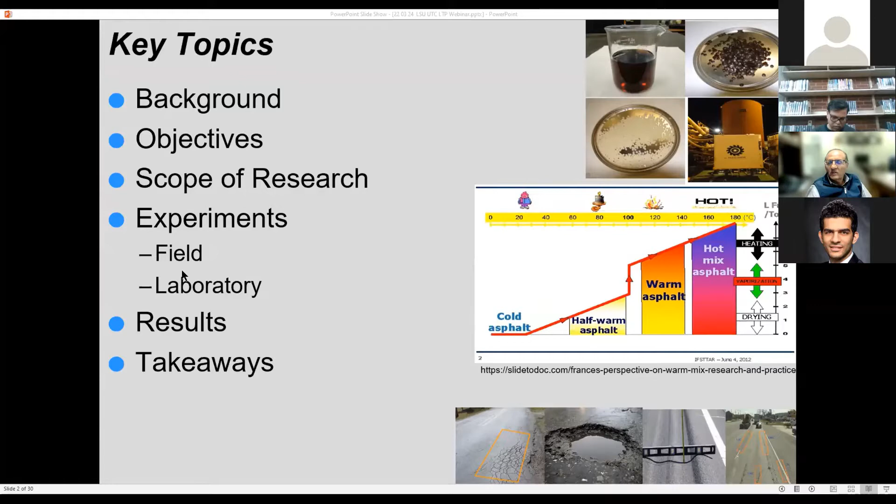Asphalt mixture has component materials typically that are asphalt binder and aggregates, and more often than not, additives are included in the mixture in order to improve performance and durability. Durability is a key topic, particularly at the national and federal level, specifically for those familiar with the Code of Federal Regulation, where it says that pavements shall be designed to accommodate current and predicted traffic needs in a safe, durable, and cost-effective manner.

So what are these things that can improve durability? First, let's know what is a durable pavement. It's one that typically would resist permanent deformation, fatigue cracking, low temperature cracking, moisture damage, raveling, durability, among other things. So these are some major distresses.

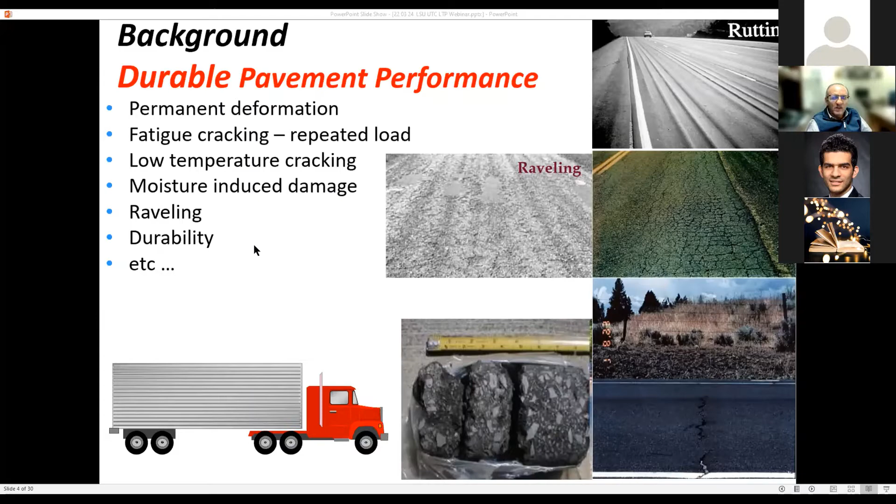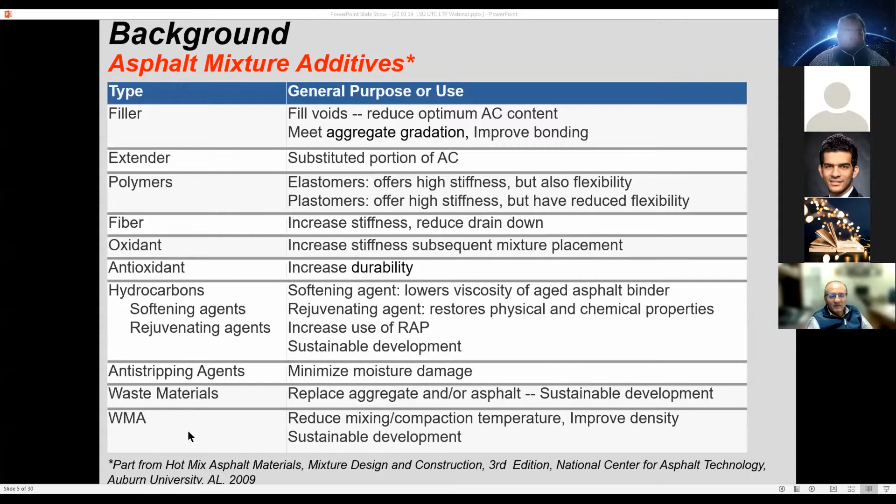The additives that are typically added into asphalt mixtures fall into a category, and these are the list of categories one can look at. They range from fillers, extenders, polymers, fibers, oxidants, antioxidants, hydrocarbons, anti-strip additives, waste material, and finally you see warm mix asphalt.

And this is our topic because it can improve durability. One of the characteristics these additives have is that they can reduce mixing and compaction temperature, which eventually leads to improved density. And further, it participates in the development of sustainable activities.

When one talks about sustainable technologies in flexible pavements, they can come in different types, falling into two categories. One can be sustainable by the type of material included in the asphalt mixtures, as listed here, or they can be sustainable by the way they're built, and there are many different ways.

This is what we're talking about today: the practice of construction where one can include additives. This particular additive is WMA, and it comes in different types. It could be chemical, organic, water-based, and also an equipment variation such as the Astec double barrel type of plant.

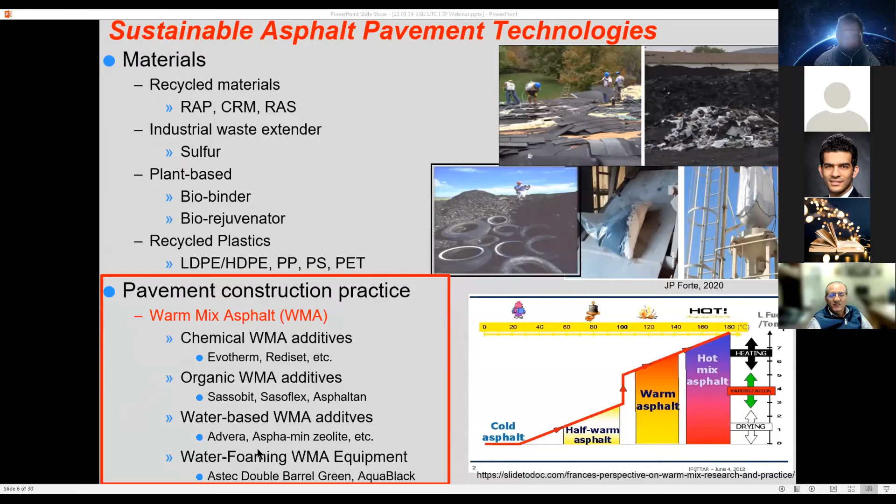This slide shows a recent survey done in 2019 by the National Asphalt Pavement Association, which cites about 157 million tons of asphalt mixtures produced in this country, and a significant amount of that, about 80 million tons, included WMA technology. So we are making headway into including those additives since it was introduced about 10 to 15 years ago. That study also showed that typically 10 degrees Fahrenheit is used to reduce temperature.

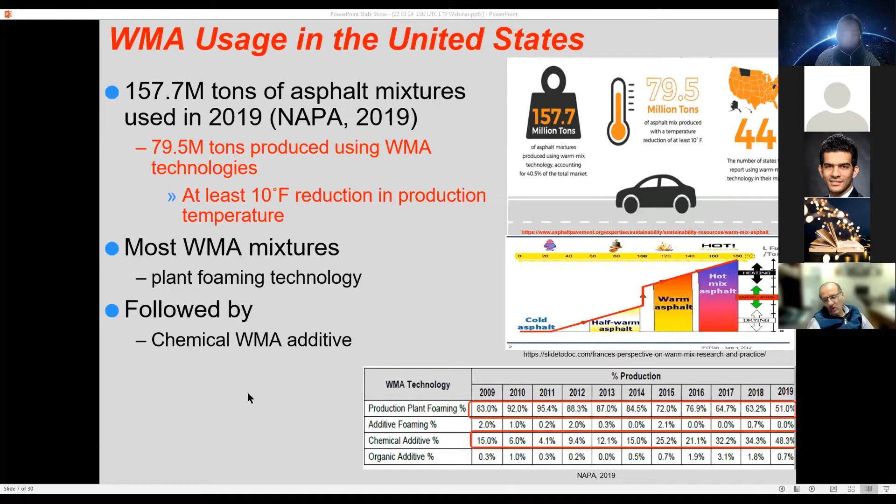Most WMA mixtures use plant foaming because you don't have to add anything, and the second approach is to include some additives. So the advantages of using WMA additives are listed here, and it includes basically allowing you to reduce the mixing and placement temperature, which means it can improve the workability of the asphalt binder.

It can also establish a longer paving period, reduce energy consumption, and participate in the reduction of emission of greenhouse gases. From a material standpoint, it can allow you to use an increased RAP content, and all these things can be incorporated into the development of a framework for sustainable development.

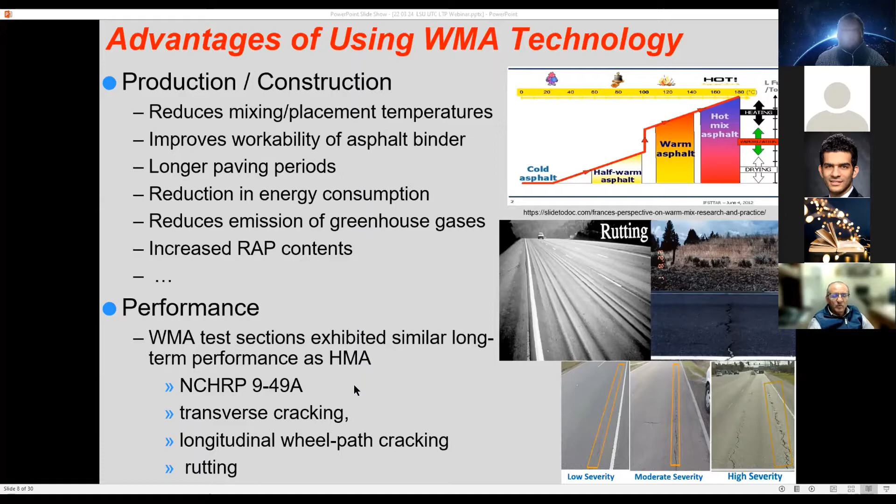In terms of performance, we know the advantages, but what do they actually do? Is there an established track record? At the national level, there was an NCHRP 9-49A study, which was one of the most extensive looks at WMA performance in the field. Some of the findings there concluded that WMA performed as well as conventional asphalt mixtures relative to distresses such as cracking and permanent deformation.

That led us to the objective of the current work sponsored by our DOT, which is to look at field performance of WMA technology built several years ago. How did they perform? At the same time, when we built them, we conducted several mechanical tests in the laboratory to see which of those tests can correctly rank what is observed in the field.

To achieve this objective, we looked at various sites around the state, north, south, east, and west. Those 4 field rehabilitation projects had about 12 test sections. On those sites, we were able to do data mining from our pavement management system, which allows us to compute the performance of these materials. Our PMS system lets us look at indicators of distresses, develop indices based on severity, and then look at the overall performance combined across those various distresses.

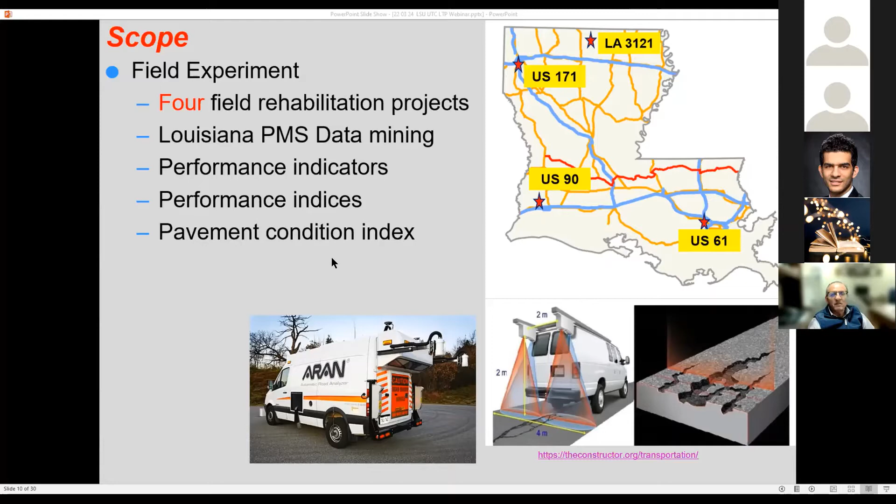So one can make a direct comparison to the ones that include the WMA additives, which could be of several types, as each section had different additives. For example, 3121 had Evotherm, the 61 had Sasobit and foaming, the 171 had Rediset and foaming, and US 90 had Evotherm.

Some of those sites also included an increased RAP content, from 15 to 30%, in 3121 and route US 61. Some of them were built on composite structures, so that might yield some issues in the results, because it's not really a material issue — if there's a problem underneath in the composite, like the PCC or the cement-treated base, that's going to reflect on the surface performance. So keep that in mind: if we see anomalies, that's not necessarily due to the additives, it's probably due to something underneath.

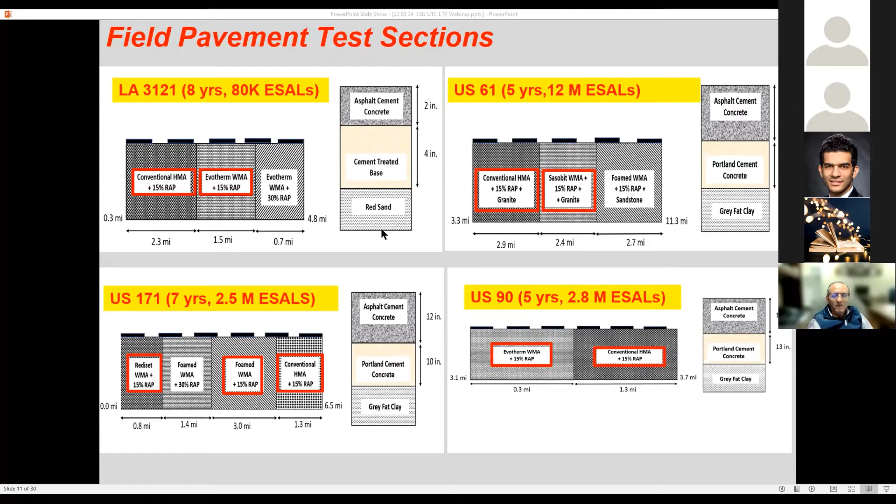This process is very tedious. It involves a lot of data mining because you have to separate the distresses. It's collected every 1/10 of a mile. We also wanted to separate, for example, load-associated cracking versus non-load associated, meaning edge cracking and longitudinal joints, because these are not really related to the performance of WMA.

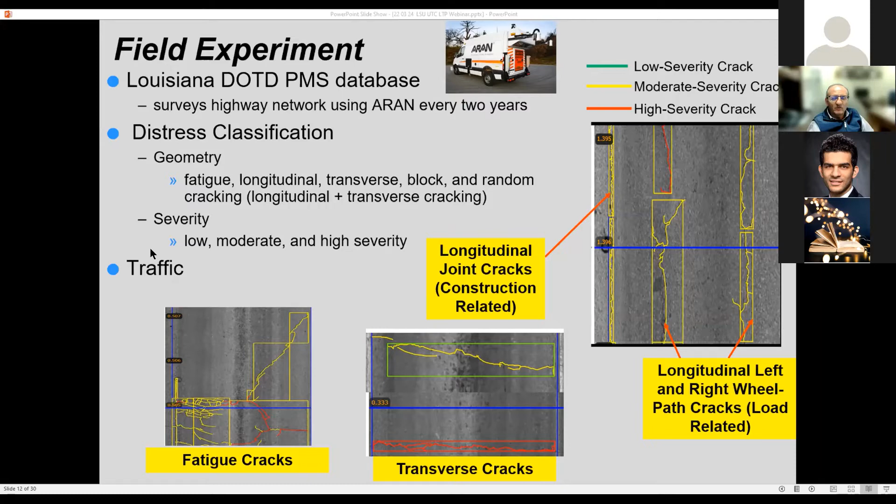Then we looked at combining all the distresses together, the indicators and indices, to compute a PCI that looks at the overall condition of the pavement. So it gave us a lot of tools in terms of field assessment.

Now we go back to the laboratory, because the objective was: is there a lab test that can rank those distresses at high temperature and intermediate temperature specifically? At the time the study started, we had an LWT for high temperature, flow number for high temperature as well, and we looked at 2 tests for intermediate temperature cracking - the SCB per ASTM D8044 and the dissipated creep strain energy test.

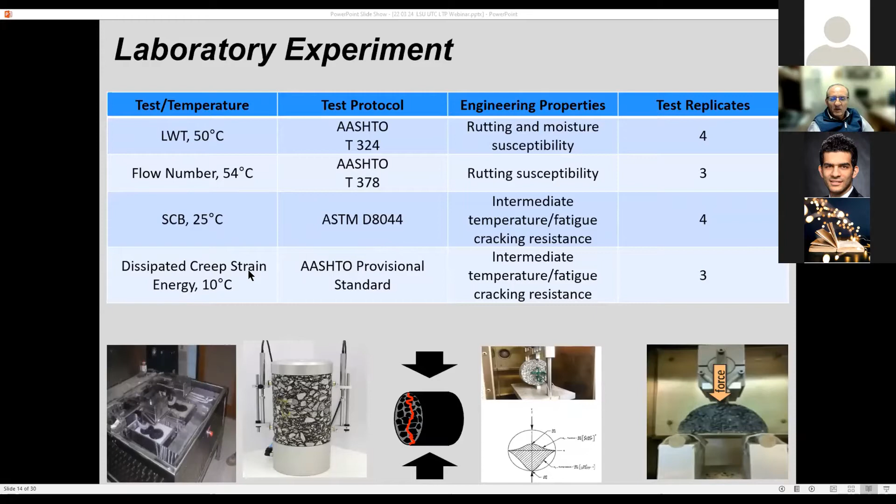So now we've got all this information. Let's look at a snapshot of some of those results. There is a report on this for those of you who are interested, as well as a TRB paper.

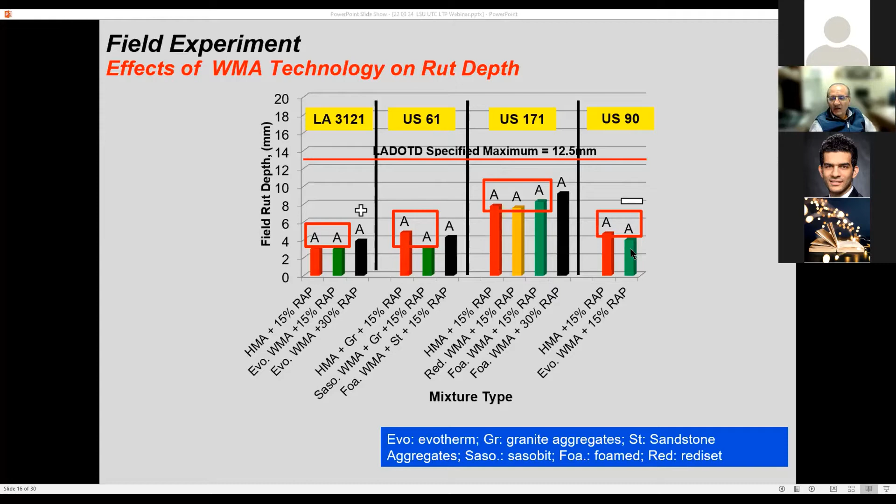If you look at the projects on US 61, what you see is that it had slightly lower rutting as compared to the conventional one. Similarly, one can look at the 171 and US 90 - WMA did well in terms of field rutting. So at least the technology seems to be promising.

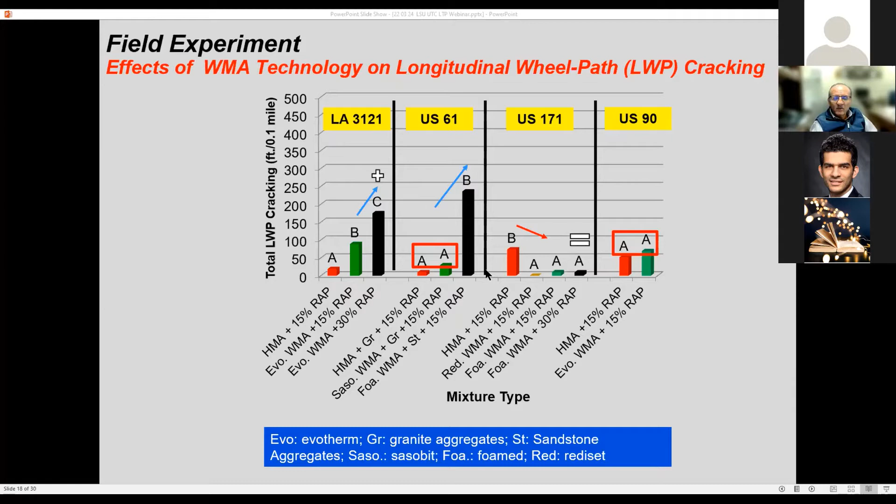Further, if you look at the effect of that 30% RAP, it does show a slight increase, however it is statistically similar. Once again, you see that there are effects of the underneath layer that may cause some results that do not match what's expected.

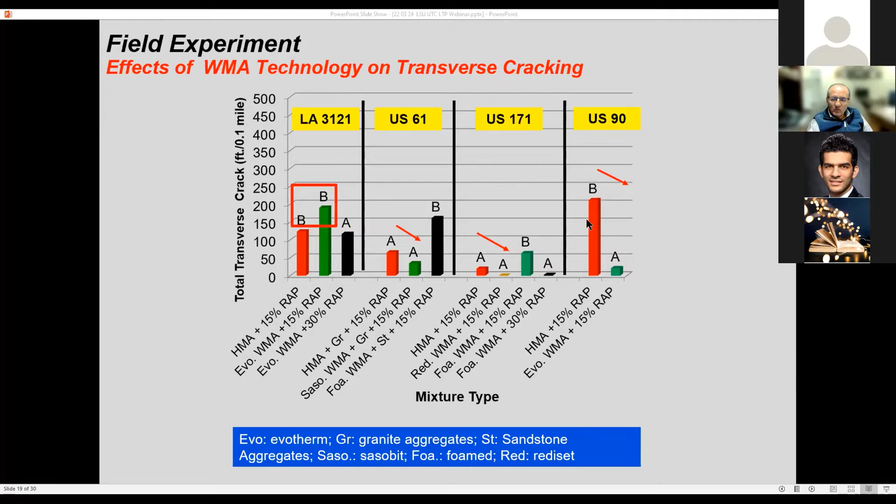Similarly, in other sites, US 61 shows similar results in these particular systems. Some of them had slight variation, not only in the content of the additives, but also aggregate types, so this could be a contributor as well. When you deal with field conditions, sometimes that's what you get.

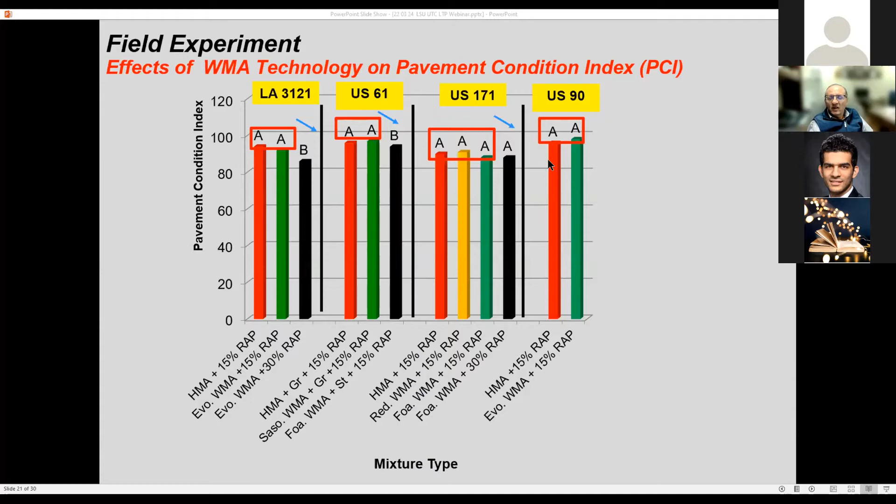Looking at US 171, that's our best controlled experiment, you see the effect of these various additives and the effect of RAP, as well as on the US 90 system.

So now I've shown you a lot of results, which is basically a snapshot. It's not every type of distress, it's not every type of indicator. So what we wanted to look at is, okay, let's group where WMA is either equal or better in all of those 34 various pairs we looked at, in terms of the performance indicator, the performance indices, and PCI. That gives you a bigger picture.

What you see here is that in those mixtures where WMA was at least equal in performance or better than hot mix asphalt, we had 71% of those pairs of the 34 systems we compared. In terms of performance indices, that similar statement increased to 73%, and in the PCI world, it increased to 75%. So that gives you an indication of how WMA technology did in the field in terms of measurement.

So that's the first objective we looked at. The second objective was, how did these laboratory tests compare to these measurements? So these are the 4 sites, and this is each section in each site.

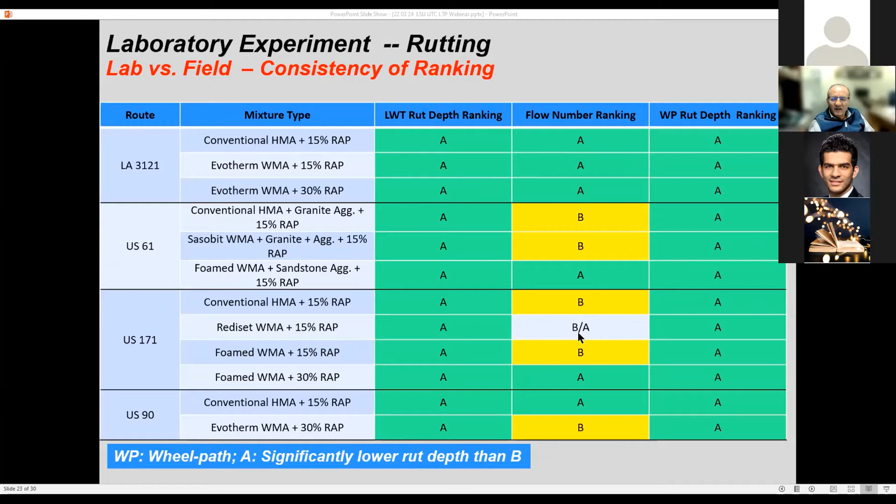You would see this is the high temperature laboratory test, another high temperature laboratory test which is LWT, and a flow number. The last column is the field measurement, and that gives you a snapshot of whether they have a similar ranking or a different ranking. You could see that in these cases, some of them have a slightly different ranking than the one measured in the field.

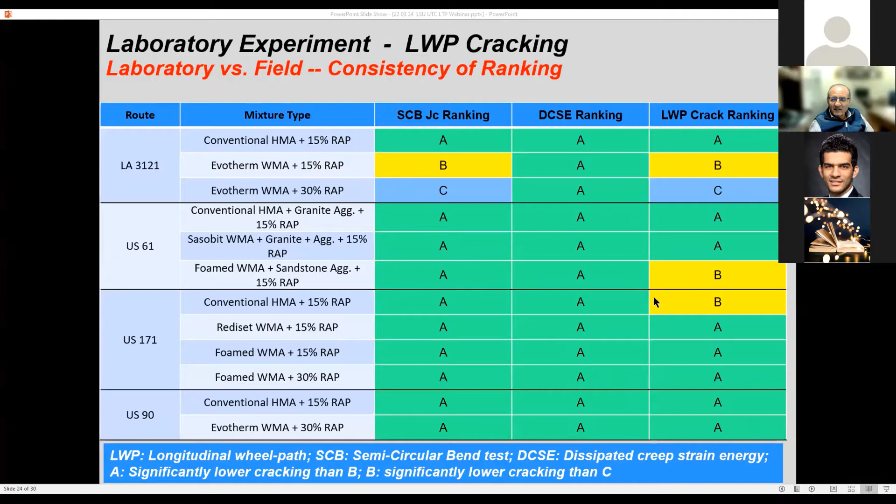Looking at the same intermediate temperature cracking, fatigue cracking was able to correctly rank those by SCB-JC, as opposed to the dissipated creep strain energy, which was not able to. So to put this in numbers, the ability of a laboratory test to correctly rank mixtures was 100% in terms of LWT and 87% in terms of SCB-JC for those test sites we evaluated.

So that gives you an idea of whether the laboratory test developed and used relates to field performance. These are some of the technical data that can offer a baseline for whatever mechanical test you want to use.

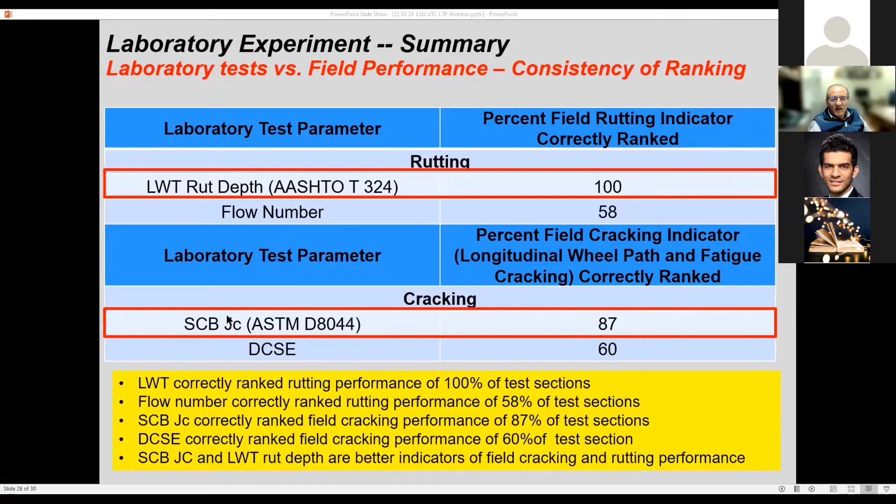So the key takeaway, in summary for this presentation, is that what we observed is that WMA test sections did well when compared to HMA sections.

And specifically, those WMA sections showed significantly higher resistance to cracking as compared to the control mixture.

In terms of laboratory parameters, LWT is a good indicator of high temperature performance, as specified by AASHTO T324. The SCB-JC parameter, as specified by ASTM D8044, is another good indicator for field cracking for the sites we have measured and the tests we have done.

In some additional observations, we saw increased RAP content resulted in lower LWT rut depth in the WMA section. This is again possibly due to the layer underneath the top, so it's more of a structural issue rather than a material issue.

On the 3121 site, as well as 61, the WMA section basically showed lower cracking than its counterpart in the HMA section. More importantly, all of them right now are below the rut depth of 12.5, which is the field rutting threshold that triggers an action - this is our value where it tells DOTD it's time to do a rehabilitation. So far, up to 8-10 years, and we expect to see more, they are all doing fine.

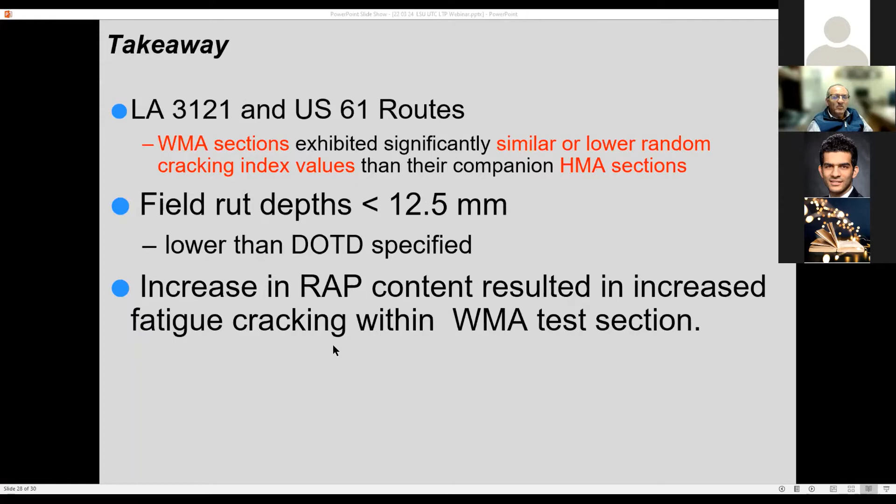Also, increased RAP content resulted in increased fatigue cracking for those sites that we have measured.

In acknowledgement, I want to thank a lot of the individuals who were involved in the development of the data and presentations - I am just the messenger. This is Dr. Moses of LTRC, a graduate student, the DOTD Pavement Research Group staff, as well as the DOTD Pavement Management section. So we have a lot of people who helped us get to this point. And with that, thank you for listening.

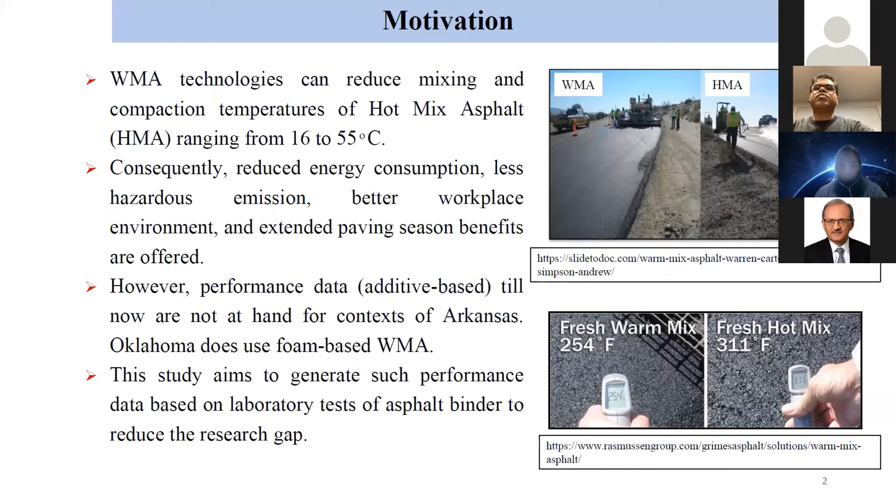From previous literature, we know that warm-mix asphalt is not new anymore. In the late 90s, it started in Germany. And in the United States, in the early 2000s, warm-mix asphalt was tried.

The first projects were from NCAT, and they used Sasobit, Evotherm, and Aspha-min, and there was significant reduction of compaction as well as mixing temperature. Also, the preliminary findings from those first warm-mix asphalt technology projects found there is a possible grade change, performance grade change, if these additives are used.

There were other researches done, but I'll just mention a few, including from my own research group at the University of Oklahoma when I first started in 2008. That is where Dr. Wasiuddin and his group started, and then we continued. So there are three citations I have provided, from when I was in Oklahoma, and we did work for Oklahoma.

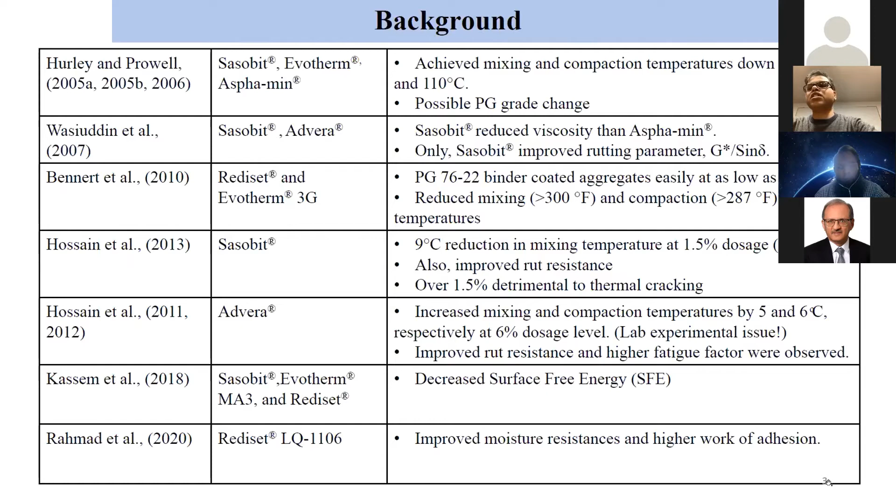The primary objectives of our study were to see how much reduction in mixing and compaction temperature would occur, and also to look into whether there is a change in binder grade, so not only mechanistic or rheological properties, but also chemical properties.

We mostly focused on SARA fraction and FTIR tests that we have done. We also did pH testing for acidity measurement, and then another thing we did was a surface science approach.

We did surface free energy calculations, and from there we looked into the compatibility between different types of aggregates and the binder to see which one is more stripping resistant.

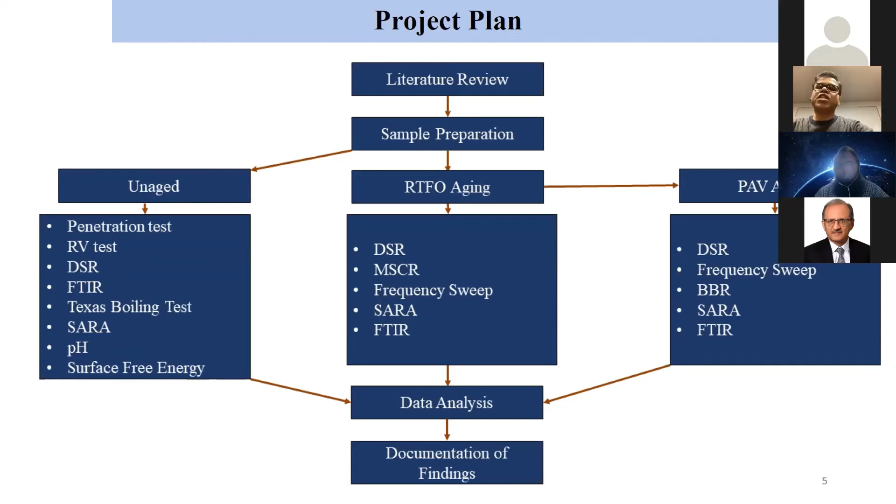We also did some very limited, I would not call it mixture, but it's kind of a loose mix test - we did the Texas boiling test to see what kind of retention of binder would occur with different kinds of aggregate. Then we came up with some concluding statements based on this limited study.

The materials we used were three performance-based binders: PG64 minus 22, 70 minus 22, and 76 minus 22. Those binders are used in Arkansas and are approved by the Arkansas DOT. We designated them binder B1, B2, and B3.

We tested all three binders from two different sources: one from Ergon, another from Marathon. Typically Ergon uses Canadian crude, and Marathon mostly uses Arabian crude. So we were looking to see if crude source has any influence, and actually it does - from other studies we found that, but at least we tried from two different sources.

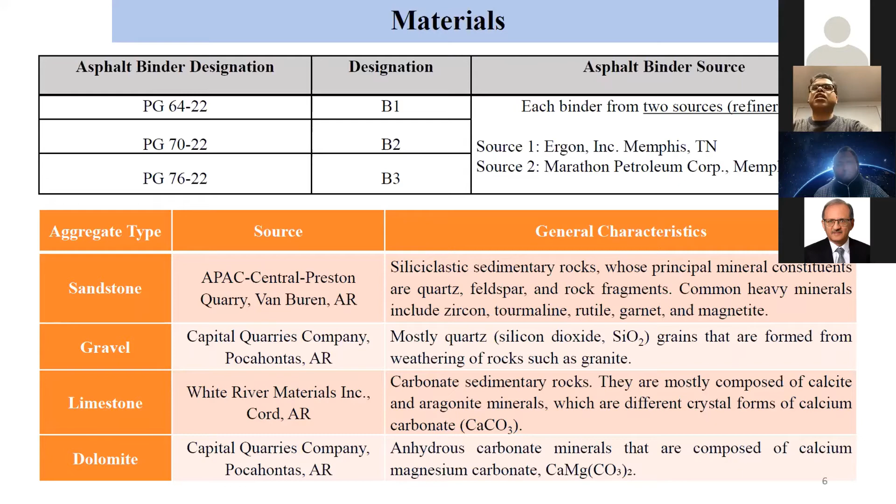We also considered four types of aggregate: sandstone from APAC-Central in Van Buren, gravel from Capital Quarries in Pocahontas, Arkansas, limestone (White River) from Cord, Arkansas, and dolomite from Capital Quarries in Pocahontas, Arkansas as well. Some general characteristics are provided, based on the literature - we did not do any chemical testing of the aggregate ourselves.

Okay, and then we tried four types of additives. So those are Sasobit, Advera, which is actually Advera 401 PS, Rediset, and Evotherm. We have listed from MSDS data files what kind of color, appearance, and chemical composition they have, and there are some pictorial views of those additives as well.

Briefly, Sasobit is a Fischer-Tropsch wax kind of material, long carbon chain. Advera is kind of a zeolite, with about 20% water. Rediset is alkylated fatty polymers, a combination of chemicals including C4H10O3 and other materials. Evotherm is modified tall oil fatty acids.

And the recommended doses - these are the recommended doses. Sasobit is 0.8 to 3% by weight of the binder. Advera is 0.05 to 0.3% by weight of the mixture, which is different from by weight of binder. The other two, Rediset and Evotherm, are by weight of the binder. Rediset recommended is 0.3 to 1%, and Evotherm is 0.25 to 0.5%.

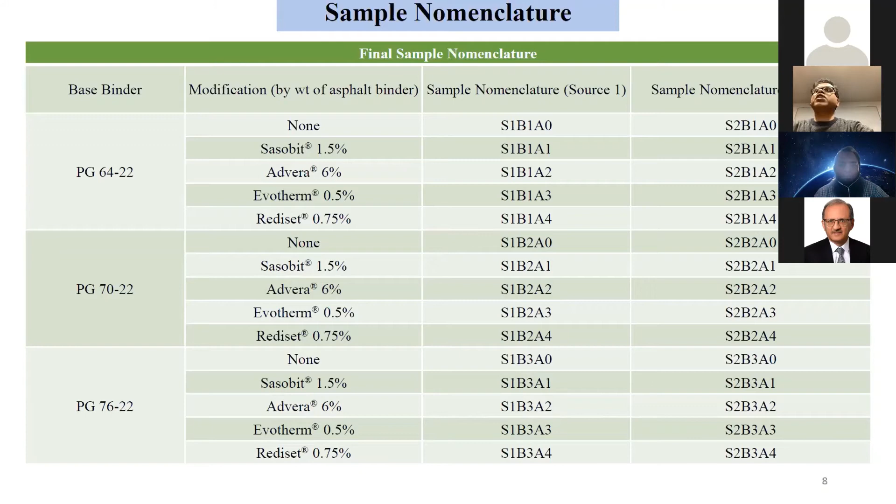Then we have A0, A1, A2, A3, A4. A0 is no additive, A1 is Sasobit at 1.5%, A2 is Advera, A3 is Evotherm, A4 is Rediset. The fourth column is from the other source, Marathon Petroleum Corp., source 2.

Next slide. The methodology: we showed pictorial views of different test methods, including how the sample was blended. We did hand blending, manual blending, for this project. For other projects we use a high shear mixer, but for this one, hand blending was more convenient and easier to control.

Then we did the penetration test. This is a test some of you may have used for your research work, though maybe not anymore, but Arkansas DOT still uses it. In all of our projects that Arkansas DOT sponsors, we now include the penetration test because they are familiar with it and still run it. We also did other Superpave tests: rotational viscometer, rolling thin film oven, pressure aging vessel, and a degassing oven to remove excess air, followed by dynamic shear rheometer.

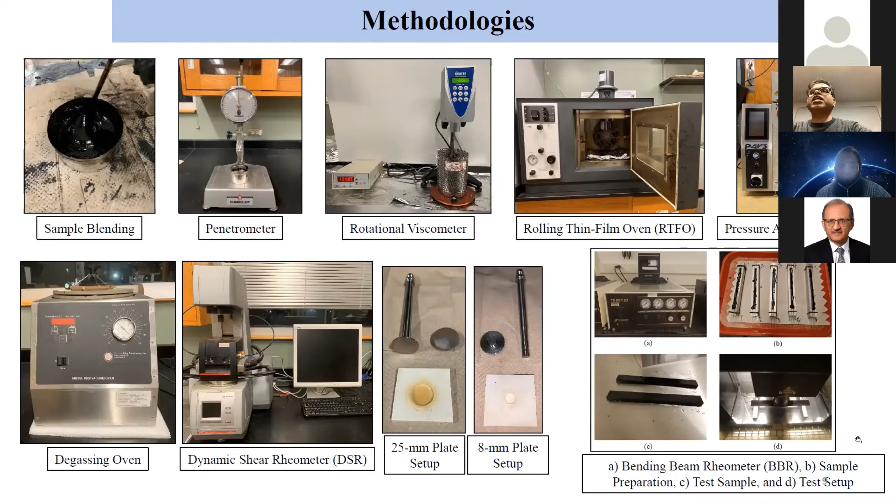It was also showing some plates, like 25mm and 8mm plates, and the bending beam rheometer. We didn't actually have the bending beam rheometer ourselves, so we got help from Purdue University - Dr. Haddock helped us do this test.

We also did SARA analysis. We're capable of doing SARA analysis ourselves, but because of COVID and other issues it was taking too much time, so we got help from Paragon Testing - they performed the SARA analysis for us. Dr. Cordin Daranga and Dr. Galen Baumgartner helped us with this SARA analysis.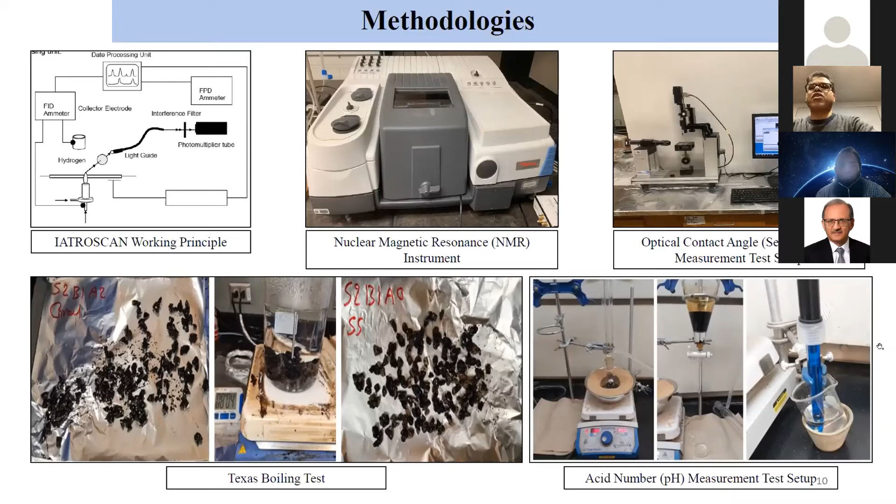You can also see a snapshot of the contact angle analyzer used to run the sessile drop test, along with some snapshots of the Texas boiling test followed by the acid number test. Now let me give you some of the test results. Next slide.

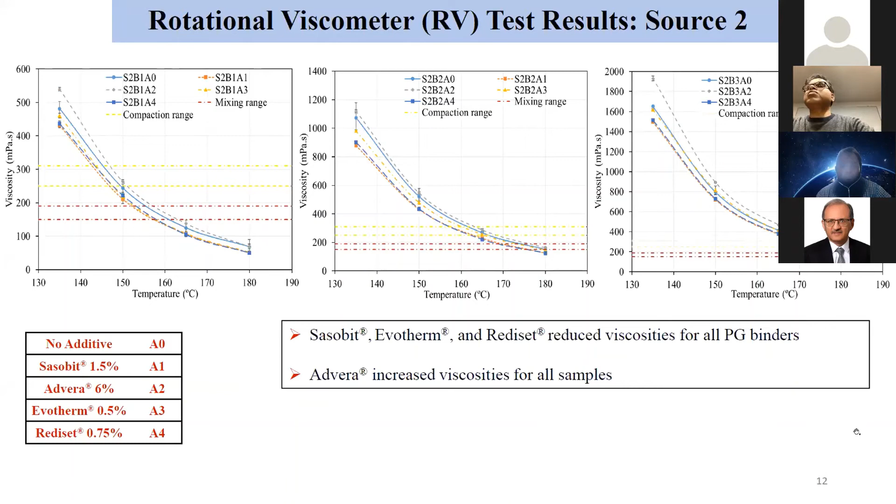The next slide is for source 2 binders, where we saw a somewhat different scenario. That time we found that Sasobit, Evotherm, and Rediset all reduced viscosities for all binders except Advera.

The next slide shows a typical curve of how we found the mixing and compaction temperature.

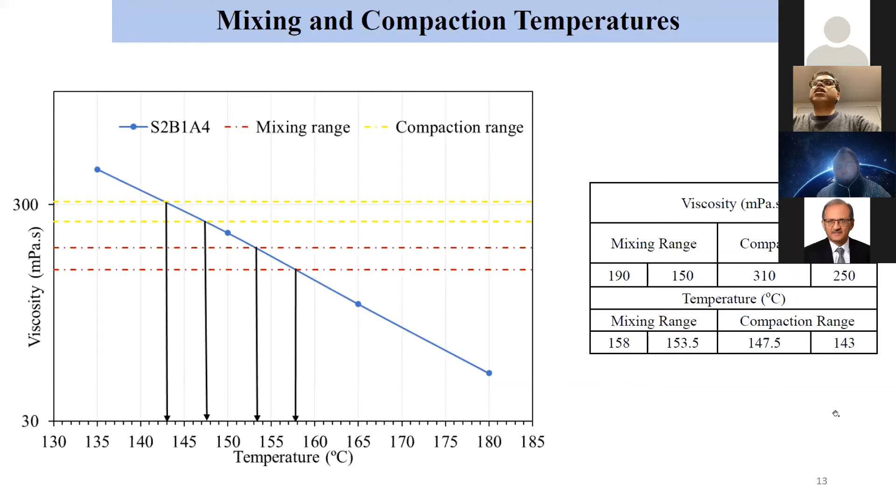Mixing viscosity is 170 millipascal second plus or minus 20, so the upper bound is 190 and the lower bound is 150. That's my mixing viscosity. Compaction was 280 plus or minus 30, so the viscosity range would be 250 to 310. From there we found the mixing and compaction temperature range.

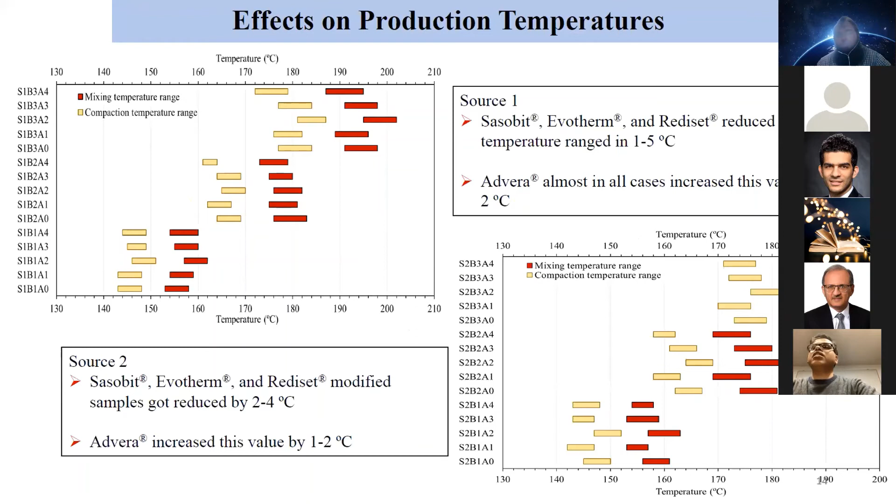Then the production temperature. This slide shows the production temperatures. For Source 2 binder and Source 1 binder we did not find that much reduction. For Sasobit, Evotherm, and Rediset, mixing temperature reduced by 1 to 5 degrees Celsius, and then Advera mostly increased the production temperature because the viscosity increased.

For Source 2 binder, we found a little more reduction, about 2 to 4 degrees Celsius, and Advera also increased the temperature.

Next slide shows the penetration test. Left side is for Source 1 binder, right side is for Source 2 binder. We found that Sasobit mostly stiffens the binder, consistent with our previous study which also found that Sasobit stiffens the binder.

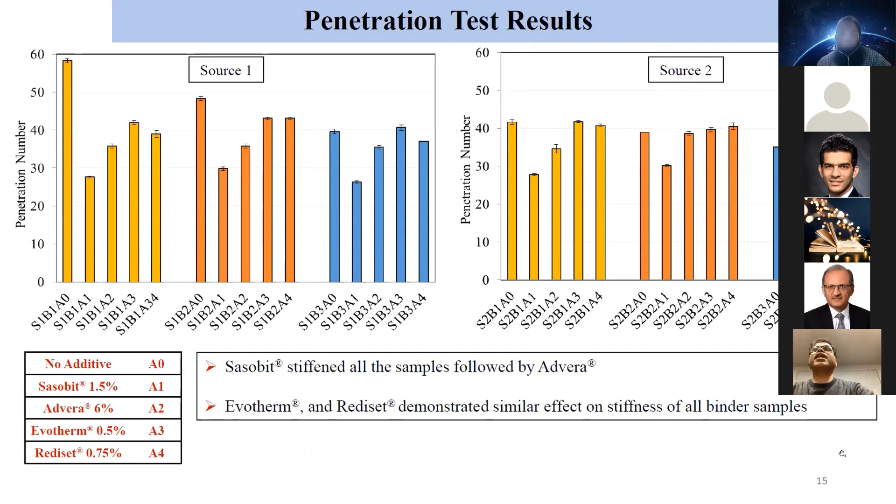Evotherm and Rediset sometimes stiffens and sometimes softens the binder, but not a very significant effect. For some binders it's a little increase, for some a decrease, so overall not much significant change.

For the dynamic shear rheometer test, as expected, Sasobit stiffened the binder so it increased the rutting factor, meaning it decreases rutting potential. Rediset makes the binder a little softer, giving a lower rutting factor.

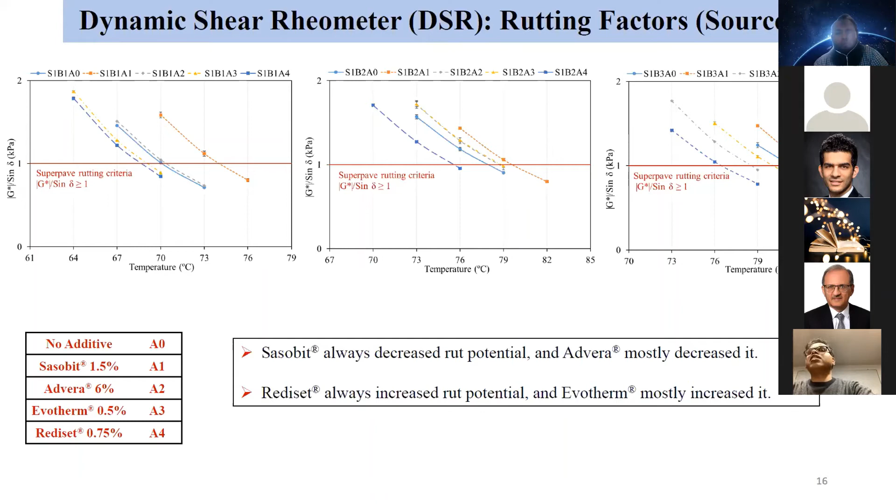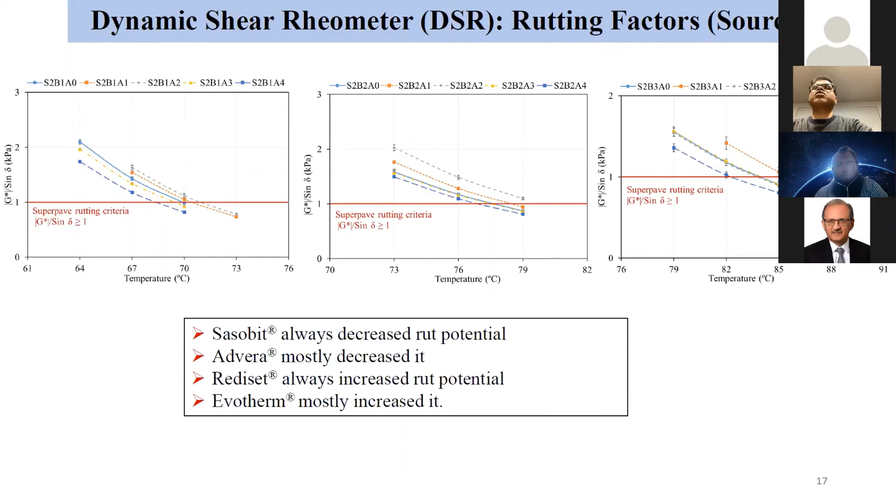In terms of fatigue performance, we tested at intermediate temperature. We found that Sasobit and Advera actually increase the fatigue factor because they make the binder stiffer. On the other hand, Rediset and Evotherm showed a reduction in the fatigue factor, indicating more fatigue resistance when modified by Rediset or Evotherm.

From the bending beam rheometer test, we could not find significant influence or detriment to low temperature performance grade, especially from the S value, the stiffness value. It made the binders even softer, all of them.

But one case, Sasobit at 1.5%, the M value was on the borderline, lower than 0.300. Even from our previous studies we found that 1.5% Sasobit reduces the M value, which is kind of detrimental.

But Evotherm and Rediset make the binder softer, which is a good sense, that is better. Overall the BBR test results did not show any significant effect.

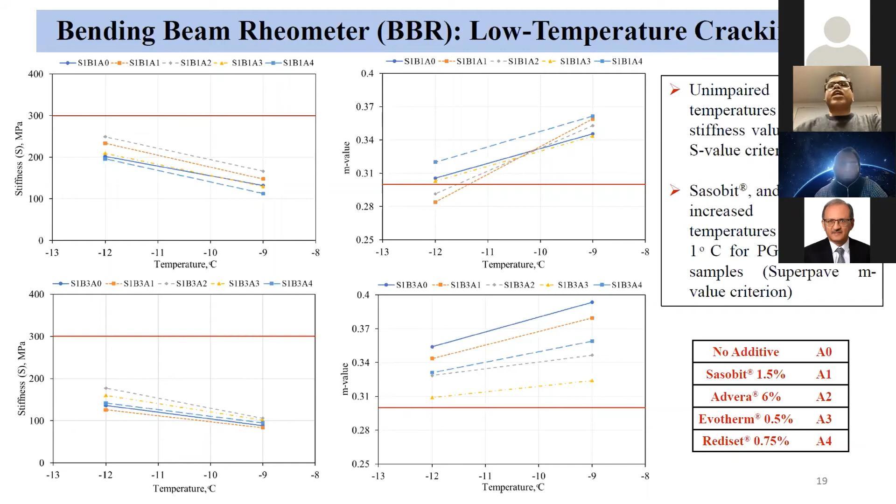Next we'll talk about the multiple stress creep recovery test. We found that Sasobit increased the percent recovery, whereas the other additives, Advera, Evotherm, and Rediset, reduced the percent recovery for a couple of binders, 64 minus 22 and 70 minus 22. Also, Advera and Rediset mostly changed the binder grade, the MSCR grade, without adding additives.

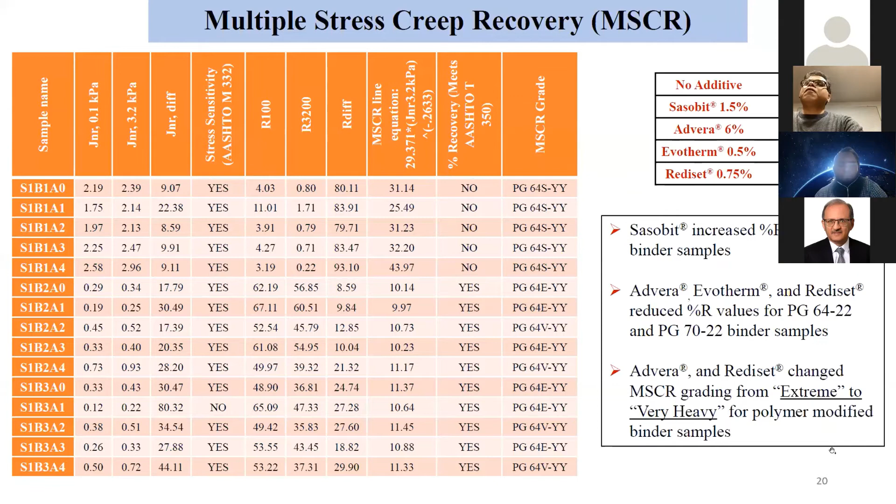It was like extreme, and then we came to very heavy. Let's go to our conclusion.

Go to the conclusion. I'm running out of time. Yeah, conclusion slide, Ayan. Let's move on to the conclusion, the concluding statement.

So we found that the viscosity reduction was most for Rediset, followed by Sasobit. With temperature, it did not go up beyond only 5 degrees Celsius. Higher reduction was seen for Sasobit and Rediset. And in terms of thermal cracking, Rediset performed better.

For chemical analysis, we did not go into details, but we found that Sasobit may increase moisture susceptibility due to lower surface free energy. Texas boiling tests support that Evotherm and Rediset showed better retention of asphalt binder, but Sasobit and Advera had poor retention.

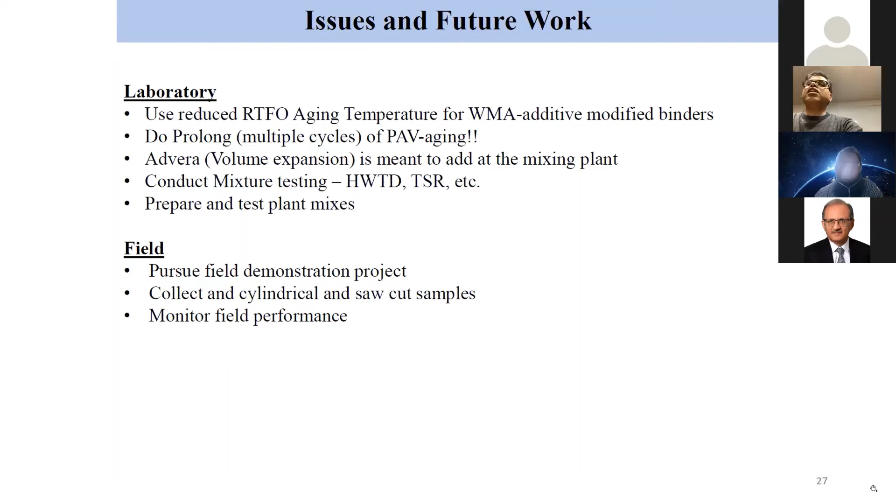Sorry, I took more than my allocated time.

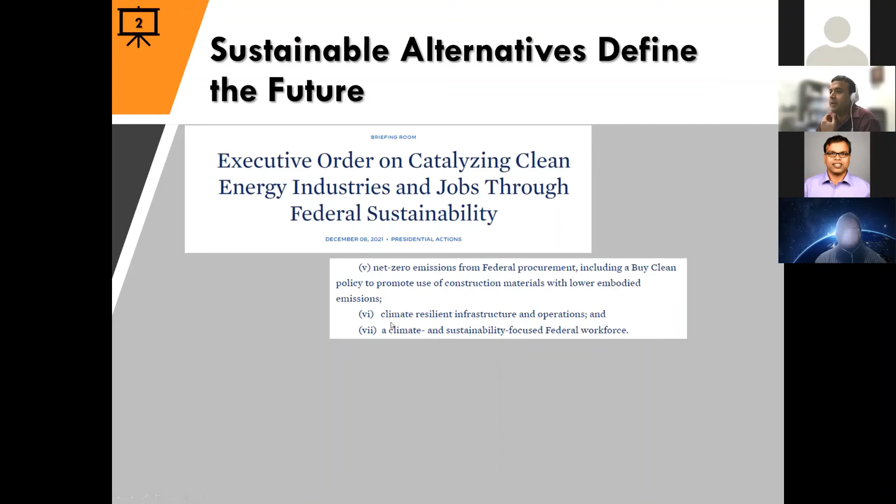Sustainability or sustainable alternatives, that's basically the future. If you look at this screenshot of the executive order from the president's desk on December 8, 2021, several sections talk about net zero emissions from federal procurement, climate resilient infrastructure, and a climate and sustainability focused federal workforce. In sustainable acquisition procurement, there's a section calling for refurbished or recycled materials, maximizing environmental benefits, and cost savings through full life cycle cost methodologies.

So essentially, as a community or society, we are moving towards looking for sustainable alternatives. And in the asphalt materials and pavements community, we should be doing that too, and we are already doing that.

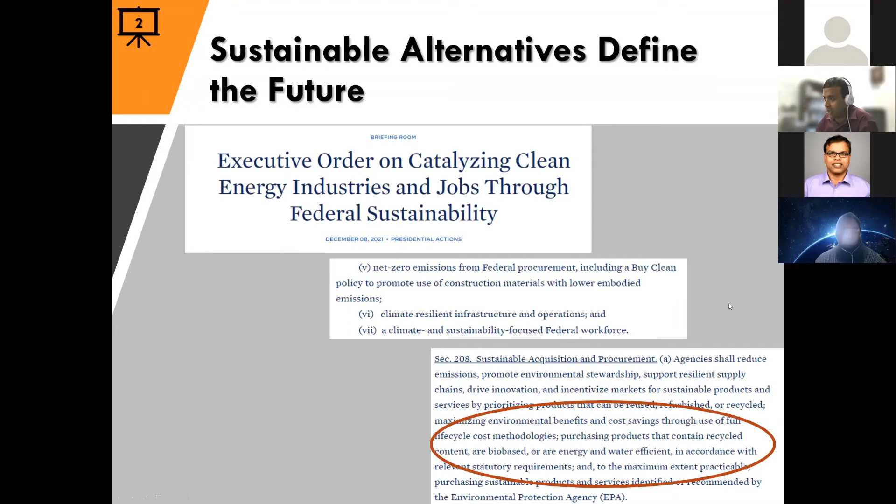NAPA also outlined its objective that by 2050 it will try to achieve net zero carbon emissions in the asphalt production and paving industry. So it's obvious that the need of the time is sustainable alternatives, and warm mix asphalt has been identified as one of them.

Okay, I'll present some of our lab test results. I'll probably go through that fairly quickly because of technology issues.

This webinar kind of got pushed back, so we'll see how that goes.

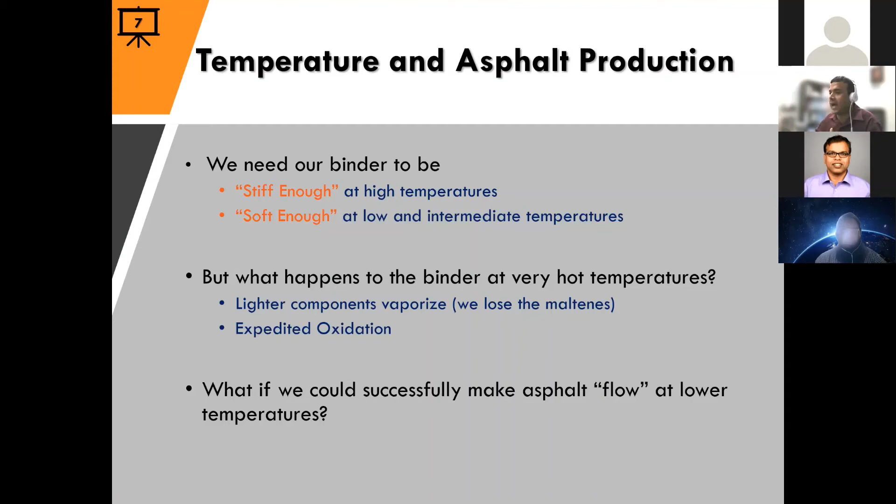But what happens to binder when we heat it to very high temperatures? We lose the lighter components, the maltenes, and we expedite oxidation. So isn't it obvious that if we could achieve everything we achieve by heating asphalt to a very high temperature at a lower temperature instead, of course - yes, I am aware of aggregate drying and moisture removal, we'll get to that - but isn't it better? Let's take a look.

This is a webinar on warm mix asphalt, and interestingly there is not one single definition of what warm mix asphalt is. Newcomb in 2006 presented a generic range: 68 to 120 Fahrenheit, 280 to 340 Fahrenheit, and then 220 to 275 Fahrenheit. So basically warm mix asphalt was 220 to 275 Fahrenheit.

But there are other definitions as well. Newcomb himself says 30 to 100 Fahrenheit lower than HMA is your warm mix. D'Angelo said 35 to 55 Celsius lower than HMA. West et al. said 25 Fahrenheit lower than HMA, all the way down to the boiling point of water. FHWA, on their warm mix asphalt website, defines it as 30 to 120 F lower than traditional hot mix.

So basically there are a lot of definitions - what is warm, right? If you go to the industry or the experts, they will say that anything lower than 300 Fahrenheit, maybe 275, we're going to talk about as warm. So the industry itself has not agreed on a single definition.

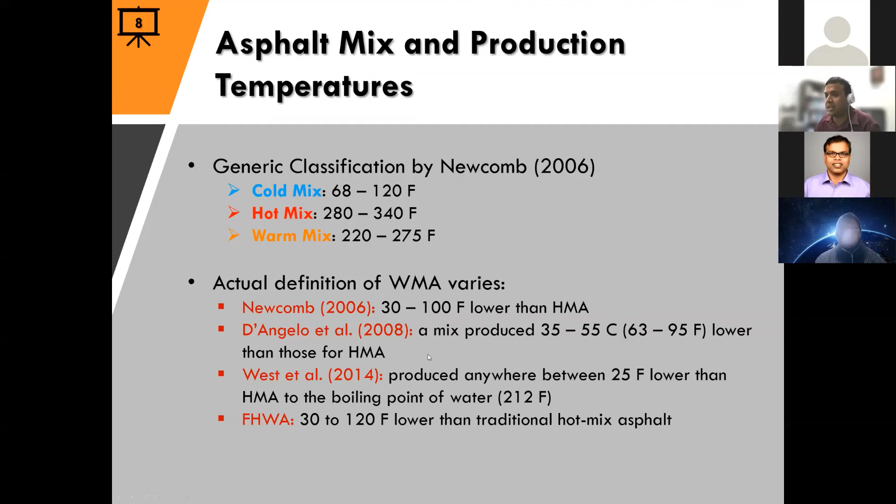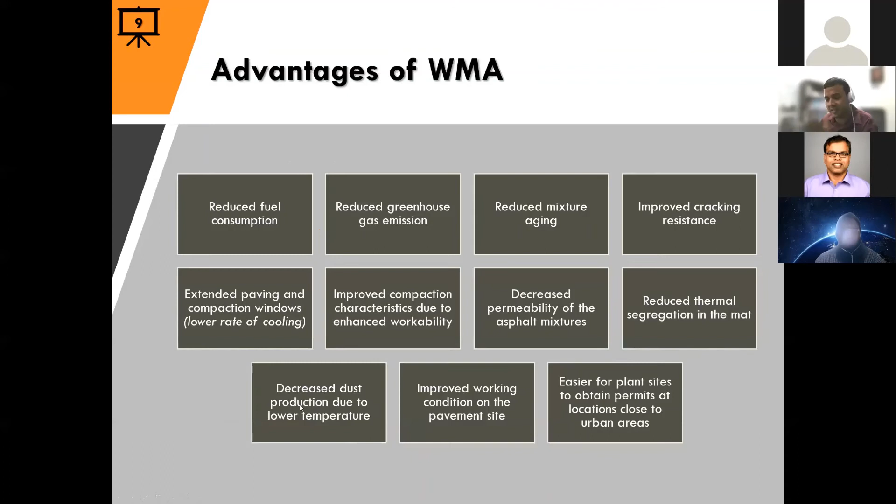Advantages - the previous two presentations have talked a lot about it: reduced fuel consumption, greenhouse gas emissions, reduced mixture aging, improved cracking resistance, all the way to decreased dust production and stuff like that. This is full in the literature, so I'm not going to spend a lot of time on this.

So what happens during aging? We all know there is short-term aging and long-term aging. When we are doing a warm mix, I want to refer to true warm mix, because if we've worked with contractors, DOTs and current practice, a lot of times in projects we add a chemical or warm mix additive, but that isn't really reducing the temperature. In this project, we are talking about actually reducing the temperature.

Warm mix actually means reducing the temperature, which reduces your short-term aging temperature, reflected through the RTFO aging. Dr. Hussein's last slide was a really nice lead into this presentation, because in this study we look at reduced RTFO temperatures and multiple cycles of PAV and everything.

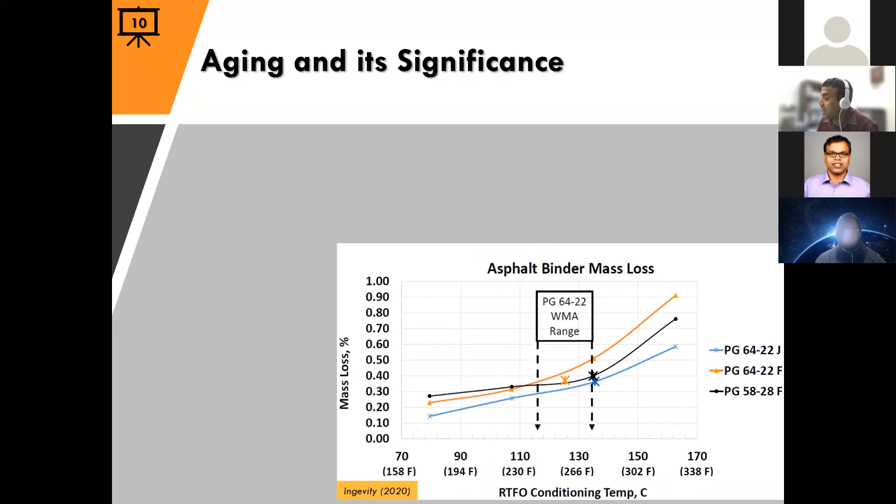So this is the history of WMA. For the sake of time, I'm going to skip this. The different types have already been presented in the previous two presentations. In this project, we are only looking at liquid chemical additives.

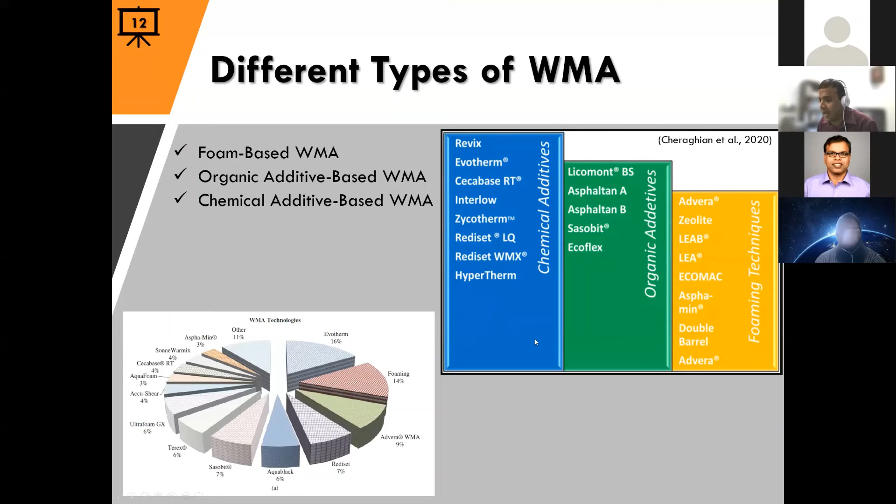In our project, we are looking at chemical warm mix, which is added as an additive to the bitumen or used as an emulsion, and it basically tries to reduce the production and compaction temperature and internal friction between asphalt and aggregate.

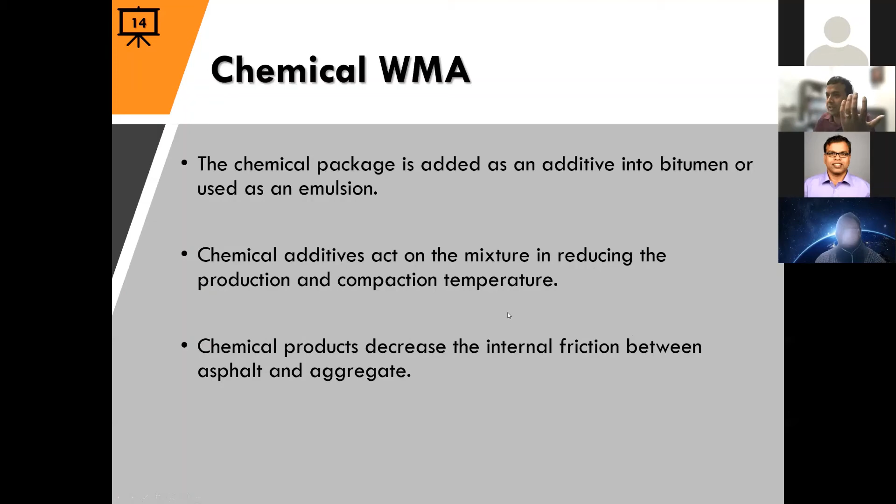So what research questions are we trying to answer here? What are the benefits of actually producing warm? Remember, we are focusing on the reduced temperature here. When we say 57% is warm mix asphalt produced, are we really taking benefit of what this warm mix technology can do for us? Are we actually leveraging it properly?

How can chemical WMA be integrated into a balanced mix design framework? Every state, or a lot of states, are now moving into performance-based mix design or balanced mix design. How do we do that? Do we really just do a BMD and then just add WMA to it? The answer is no. There has to be a systematic integration into it. And does it actually align well with the constant search for sustainable construction practices?

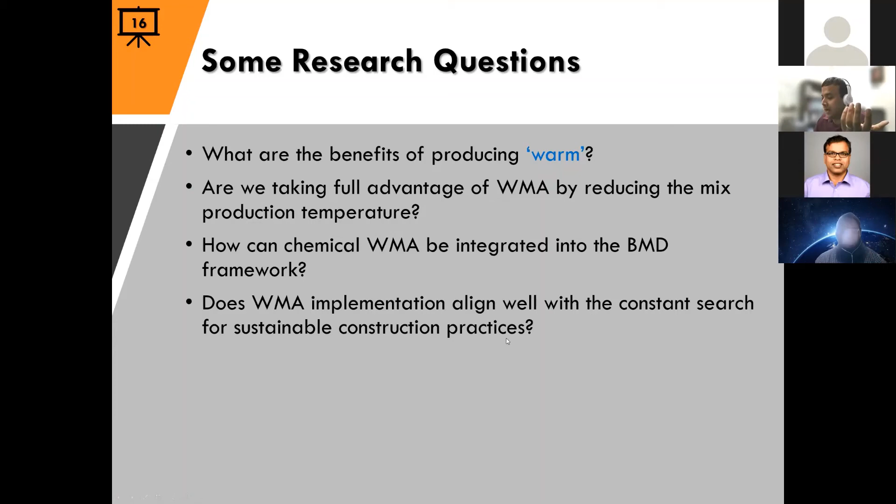This is our project. It started in January 2021, and it's a collaboration between Oklahoma State and Dr. Fujie Zhou. Runhua Zhang is a postdoc, Aishan is a grad student. Thank you to ODOT for sponsoring this, and Ingevity is a partner to us, as are several other producers.

So what are we doing here? We are testing 4 different types of binders: 3 PG64-22 and 1 76-28. We're looking at 2 different mix types, a 12.5 millimeter and a 19 millimeter, the 2 most used mixer types. We're looking at 4 different chemical WMA vendors. We selected them, and we are intentionally anonymizing the vendors in our presentations so we don't introduce any bias into our analysis. We are going to look at binder properties, then mix properties, then pavement performance prediction.

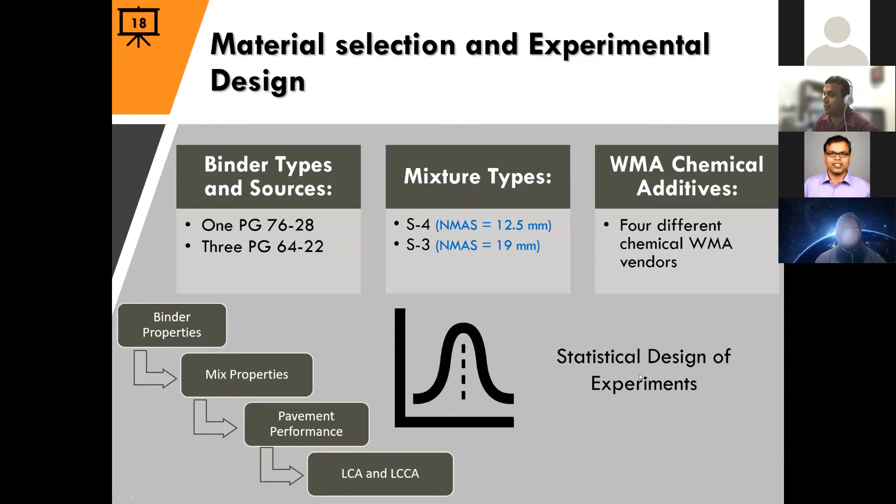We're going to do pavement performance prediction using Pavement ME design, and we're going to do LCA and LCCA to see how it is going to be beneficial in the long term. As you can imagine, we're not going to be able to do all materials for all tests, so it's going to be a statistical mixed experimental design.

We're going to look at the rutting parameter, delta Tc, and the Glover-Rowe parameter for the binder. For the mix, we are looking at rutting, IDEAL-CT, IDEAL-RT, which can be a production-time quick rutting test that was recently developed, dynamic modulus, and cyclic fatigue as inputs into our Pavement ME design and FlexPAVE work. For example, a performance quantification index: basically what is a certain characteristic for a BMD WMA mixture divided by what it would be for a regular HMA mixture, and we're going to identify the benefits.

And we're going to do long-term performance.

We're going to work with ODOT to collect data for our NCAT sections as well as the SPS 10 sections, and see how they are performing with time.

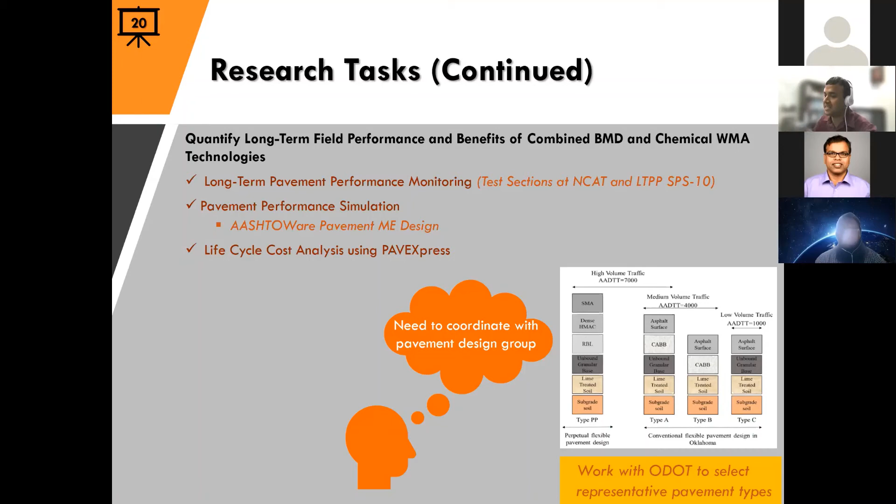This project, per se, because of its duration, doesn't have any construction and monitoring. However, we are working with contractors to actually produce mixes at lower temperature. This construction season, we are going to be batching those mixes or collecting samples, and we're going to be testing them in the lab as well.

Ultimately, we're going to produce a specification, and we are also doing some supplemental work along the lines of the sustainability thing that I just mentioned. This is not originally part of this project, but my team at OSU is actually working in parallel and collaborating with ODOT to carry out LCA, life cycle assessment, of some of the mixes, including some of the warm mix asphalt mixes.

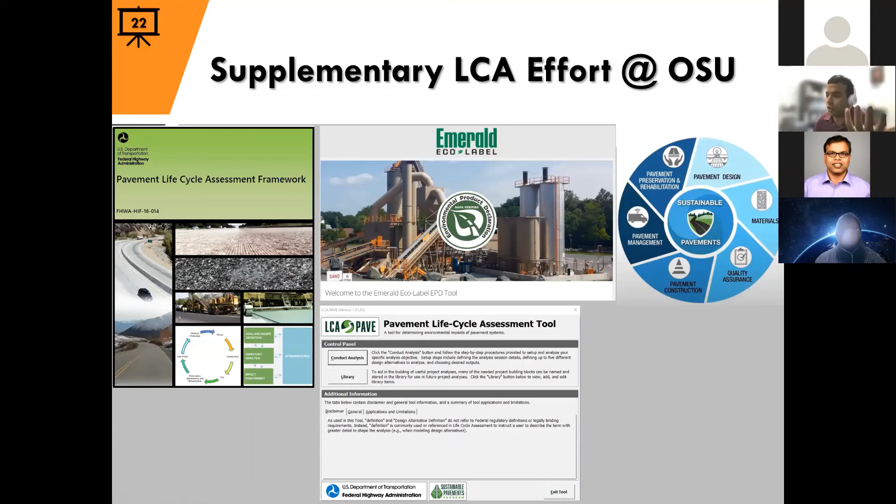Of course, there are challenges. That's a talk by itself, and unfortunately I will not have time to talk about all of that.

Now somebody will say, what is 135? Is 135 actually reflecting your WMA actual mixture? That is a very, very good question. If you convert 135, it actually becomes 275 Fahrenheit, right? So that's kind of a typical definition of a warm mix asphalt.

But if somebody is producing at 295 or so, which is still below 300 and still technically like a warm mix, is that actually meeting this criteria? The answer is we don't know yet. We are doing this at different temperatures, and we will find out what's going on.

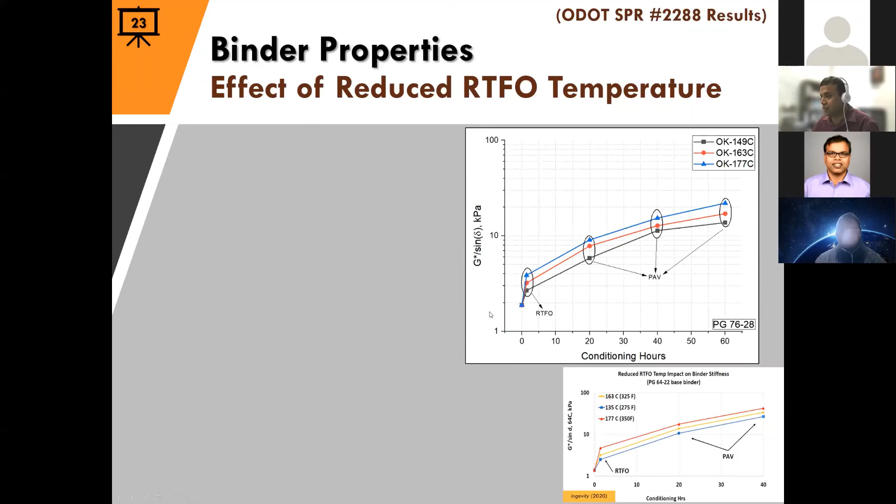In other words, the way the Glover-Rowe parameter was defined is that at 180 kilopascal, once you go beyond that, it's like a crack warning. And once you go beyond 600, that's the cracking limit. That's when cracking happens. So 0% life remains at 600 kPa.

Similar stuff, this is for a 76 minus 28. A lot of data here, and based on what Daniel told me, he would still want to end quickly. So I'm going to just stop, not go into a lot of details, but look at this.

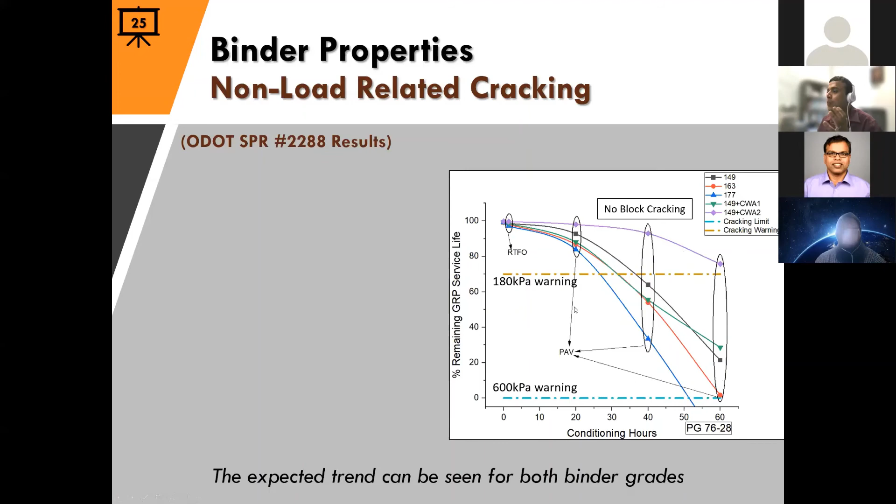We are basically talking about the whole warm mix asphalt technology, and it's really working well.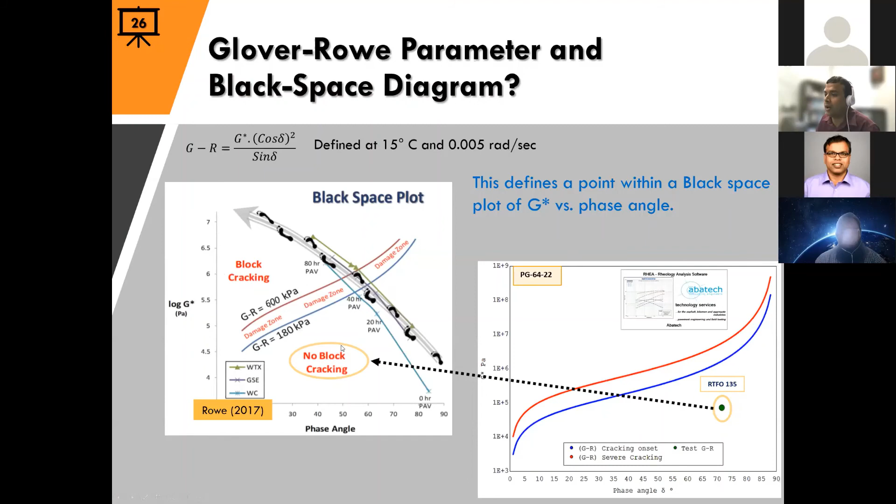This is another way of doing this, called black space diagrams. Again, G star over phase angle plotted against phase angle, and there are zones where the material lies. If you look at RTFO 135, this material lies in the no block cracking zone. I'm going to show this one plot and then we'll try to summarize.

But here's what's happening: as you keep oxidizing the material, you start moving up and up. If you oxidize it, RTFO age it at 163, and then 40 hours of PAV, now you are finally in the range of block cracking. This is one of the materials.

This line, these plots are for 64 minus 22, and these points are all for 76 minus 28. We are doing multiple different conditions.

So just from the table: this is original binder, RTFO at 135, RTFO at 163. Then after 135 you do PAV 20, after 163 you do PAV 20, after 135 you do PAV 40, and after 163 you do PAV 40.

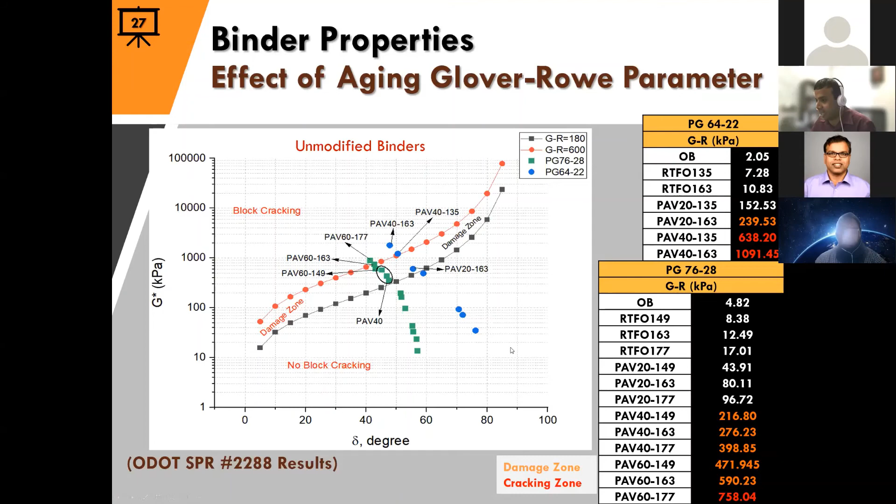Similarly, for the 76 minus 28 binder, you have 149. Of course, for such a stiff binder, you really don't do 135 — that's not going to help you at all. So we do 149, 163, 177, and after that we do PAV 20, 40, and 60 — three cycles of PAV. This is the data, but I'm going to skip over it for now.

This is another way of analyzing, for R value, proposed by Christensen. It says that with aging, the R value should increase, and the crossover frequency — where the G prime and G double prime lines cross, at 45 degree phase angle — will decrease.

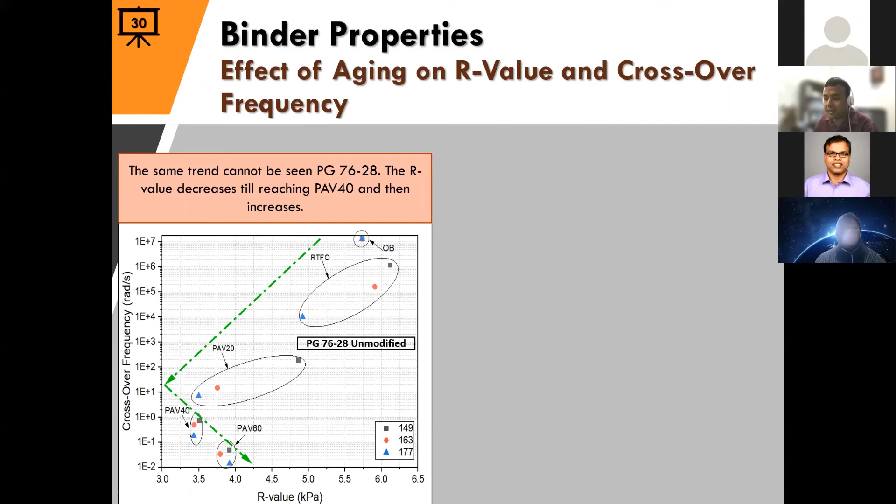For unmodified 64 minus 22, we see that trend. For modified, which is chemical additive modified, we see the same trend. But when we go to a highly polymer modified material, that trend is not visible. So what this basically means is that these traditional R value based analyses are not going to work for polymer modified materials, because the crossover frequency for the polymer may actually be different from the binder itself.

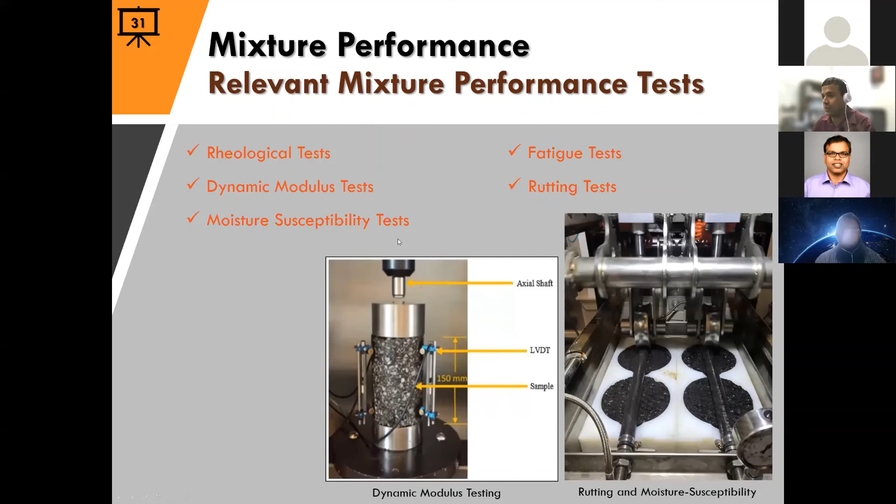There is a lot of analysis going on, and we're actually working on a paper based on some of that. I'm going to skip over this. Right now we're just working on the binder test — we're one year into the project. The mixture test is going to start sometime later this summer. We are going to work on mixing in the lab, as well as collecting field mix plant mix samples, and then we're looking at the entire balanced mix design framework and trying to incorporate that.

Finally, I'll end with a little bit on life cycle assessment. We want to analyze, because of the demand of the time, whether from an LCA point of view the warm mix asphalt actually makes sense or not. Traditionally it has been function, cost, and safety, but now for sustainable engineering we need to look at impact on the planet and impact on society. Right now, societal LCA is not somewhere we are yet, but on the environment at least there are EPDs — environmental product declarations — starting to be produced.

NAPA has several of them on their website. Several DOTs have started requiring them, and that's the way to go. Federal procurement will require that very soon, and we are going to require some of that as well.

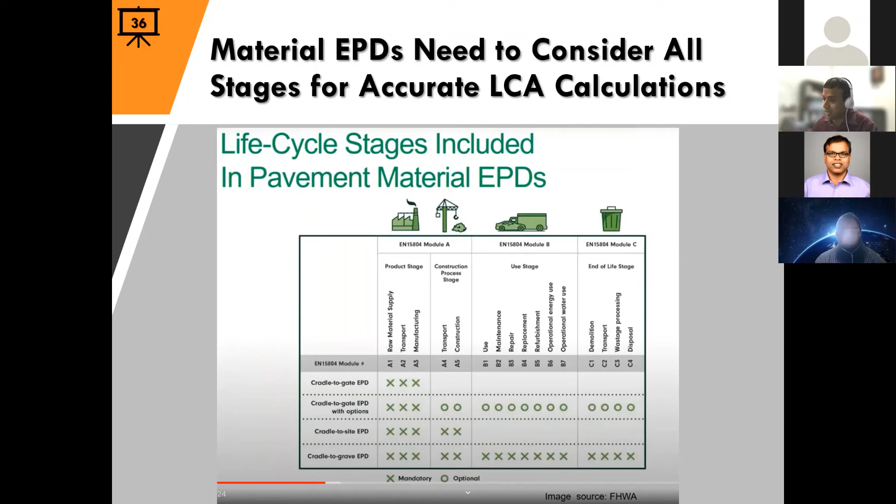This is a plot — Dr. Mohammed showed a version of this in his presentation, so I'm going to move from that. But the EPDs, the environmental product declarations, right now actually go from cradle to gate. So they don't consider how beneficial these warm mix technologies are in the field, how we are actually extending the pavement life as well. We need to consider that, because that is where we are actually going to get a lot of benefit from these technologies.

This is what they thought were challenges in front of implementing, but they also proposed some recommendations. One of the recommendations is to actually provide incentives. The Oklahoma Asphalt Pavement Association is actually considering some of these, if they can implement an incentive for producers to produce mixes at a lower temperature and use warm mix technology, because it's going to be beneficial for all of them. And that is what we are hoping to achieve with this project.

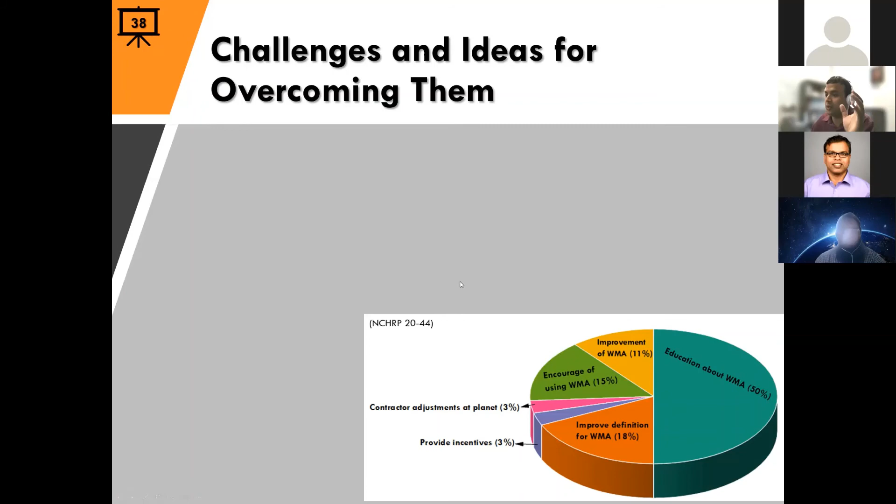We are only one year into it. This is an overview, and there is a lot to be done. So in summary, several projects and literature and our data have actually shown binder properties are improving significantly. Mixed properties, literature has shown, we haven't tested it yet, but that's what the benefit is.

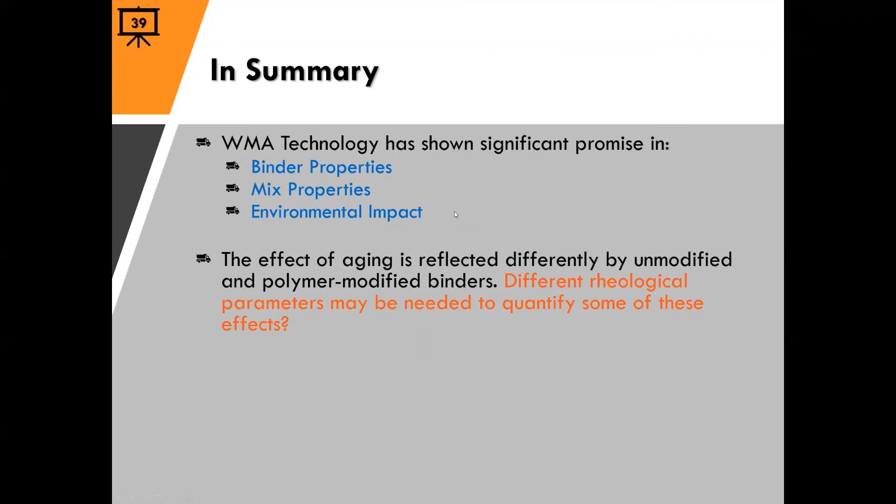The other presenters, Dr. Muhammad, showed the field condition as well, the field performance as well, and we will be looking at some of the sections in Oklahoma as well. And we need to consider how the effect of aging is actually quantified for unmodified versus polymer modified binders. That's a big difference. It's not going to be one hat fits all kind of thing.

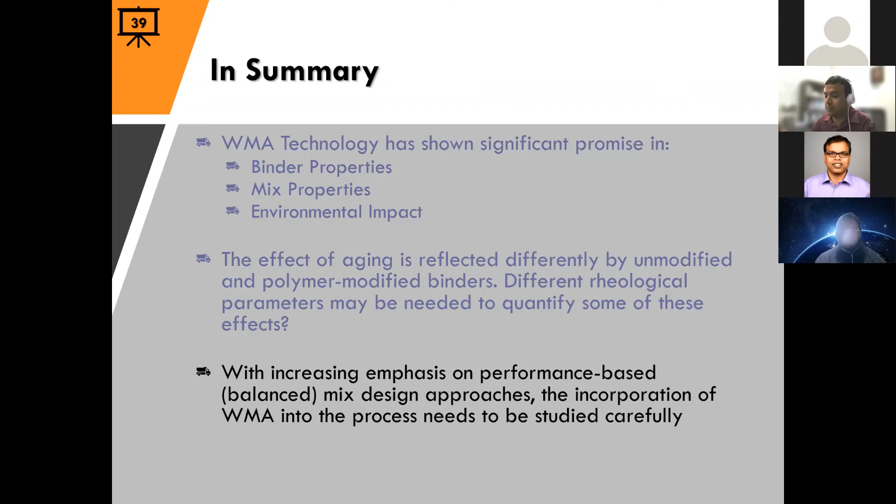And we need to find a way to accurately or properly incorporate WMA into balanced mix design. It's not just that you do a conventional BMD and just add WMA, because that doesn't really make sense in terms of anything. So that's basically what it is.

This is Dr. Zhao and Runhua from TTI. I don't think they were able to attend today. And Aishan, my student. We probably are out of time, but if anybody wants to email me any questions or anything, this is my contact information, and I will be very happy to answer everything. And finally, thanks to ODOT for the support and all our industry partners for this work.

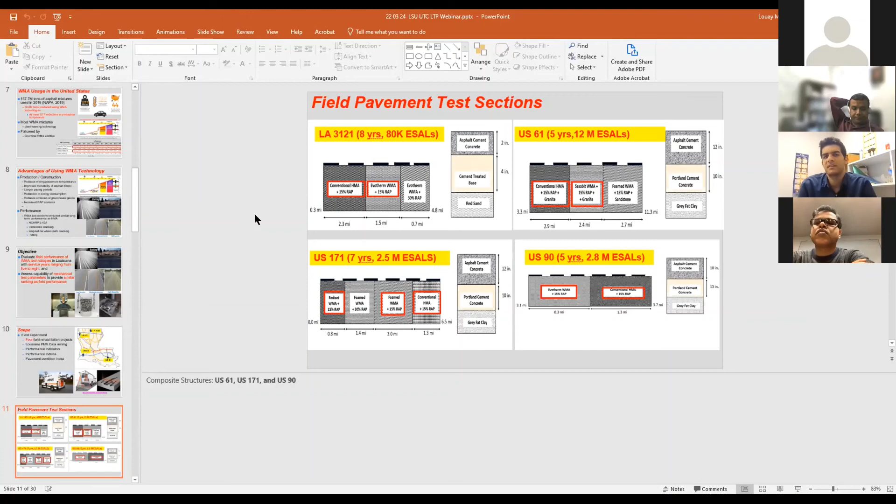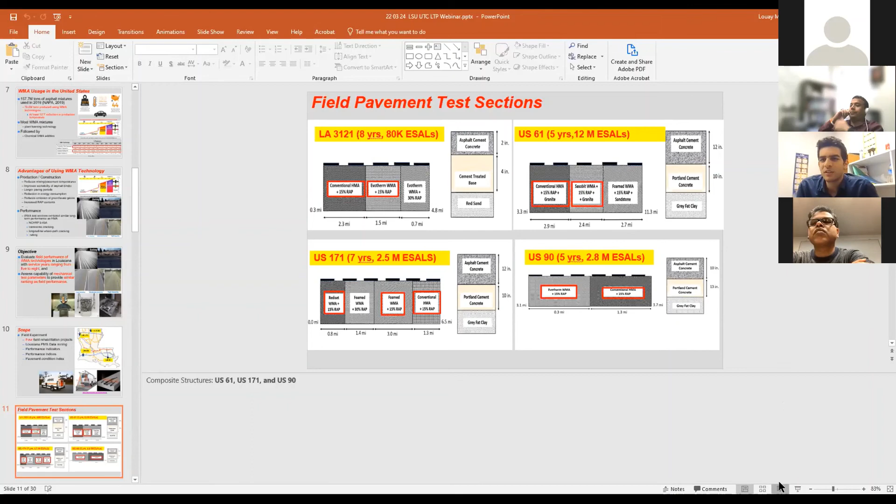Okay, and then all the values of the indices that you have presented, they were after how many years after the construction? So what was the pavement age when you collected these indices? I may have missed this. Okay, see that slide? It says 8 years. You see what the slide is? 8 years. Oh. So my following question, and this is the last question, did you look at the deterioration of the PCI to compare the service life of the WMA and the conventional?

I'm just assuming there might be a difference if you looked at the service life or the deterioration of the PCI over time. So if you look over 20 years compared to when the project is just 8 years old... I mean, this project is new, we're not there yet, we haven't got to 20 years. I think that would be exciting.

That's the purpose of this project, to continue monitoring the performance. At the time the data was collected, I believe it was 2019, and those are the ages for them at that point.

It would be exciting to look in the future about how the PCI differs over the years between the WMA and the control sections. Well, that's the whole idea. You hear a lot about lab work, but at the end of the day it's how it did in the field so we can convince policymakers that yes, it does work, whatever variation one has to allocate.

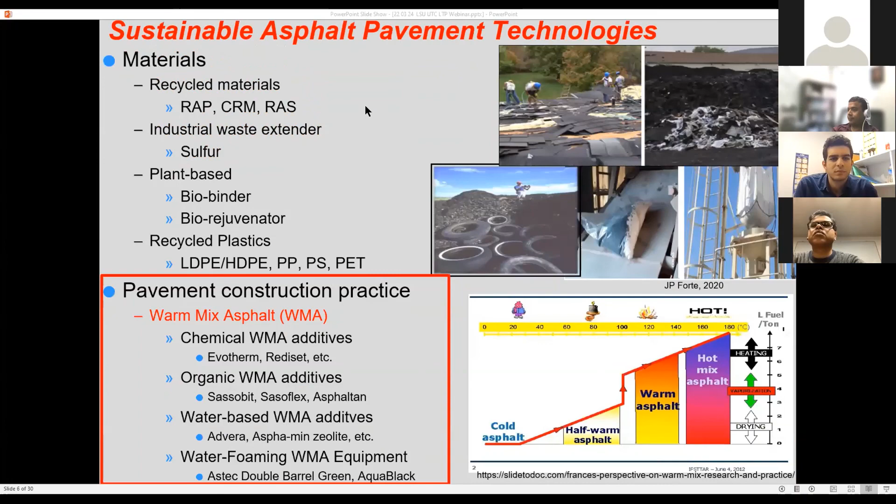So when comparing the indices between the regular WMA asphalt and asphalt sections with RAP, you looked at the final index at time of collection, right? Yes, because the title says long-term field performance, which basically means at that time of 8 years. Do we have them at year 6 and year 8? The answer is yes, and there is certainly a rate of change, but for the scope of this work, I want to know what it is right now.

Were you able to see the history of these indices degradation from PMS data over the years and compare between the pavement types? Yeah, that's what I just said. What you're asking is did we collect them at year 6, year 4, year 2? And yes, they are available. But the purpose of this work is how did it do right now. Yes, it did deteriorate over time.

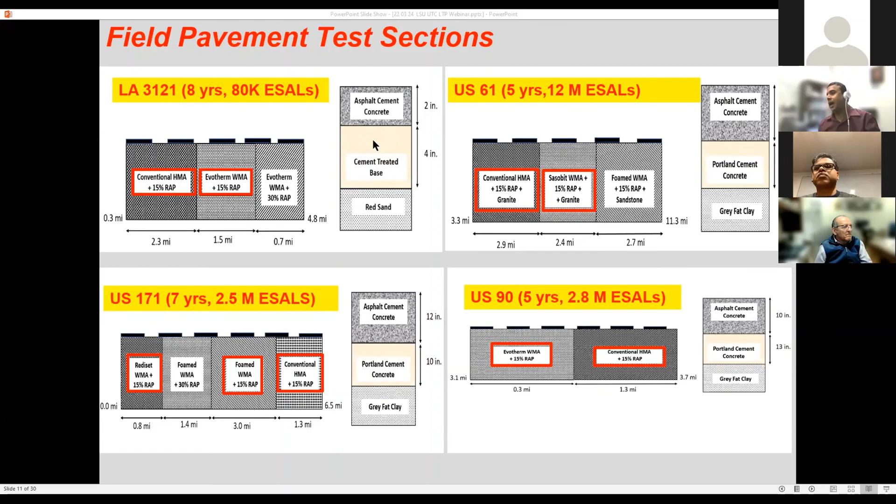I don't know if I actually understand the question. I don't know if she's talking about the definition, like how I said there are multiple definitions, or they're actually talking about at what temperature warm mix should be produced. So I'll try to answer both ways.

The production temperature is not really affected by climate, right? The production temperature is essentially set at a certain range because we need to remove all the moisture from the aggregates, heat the aggregates, make the asphalt liquid, and make that coating. That's all we need. That is the whole purpose of production temperature.

So it doesn't really matter regarding climatic zones. Let's just say hypothetically, we somehow find a chemical that does all of these jobs, and of course the water from the aggregates needs to go away, but everything gets proper coating at a temperature reduced by 200 Fahrenheit. I mean, why not, right?

So I think if that's the question, my answer is no. As long as we are able to achieve adequate coating, mixing, and workability, that's it. Those should be the factors that govern production temperature.